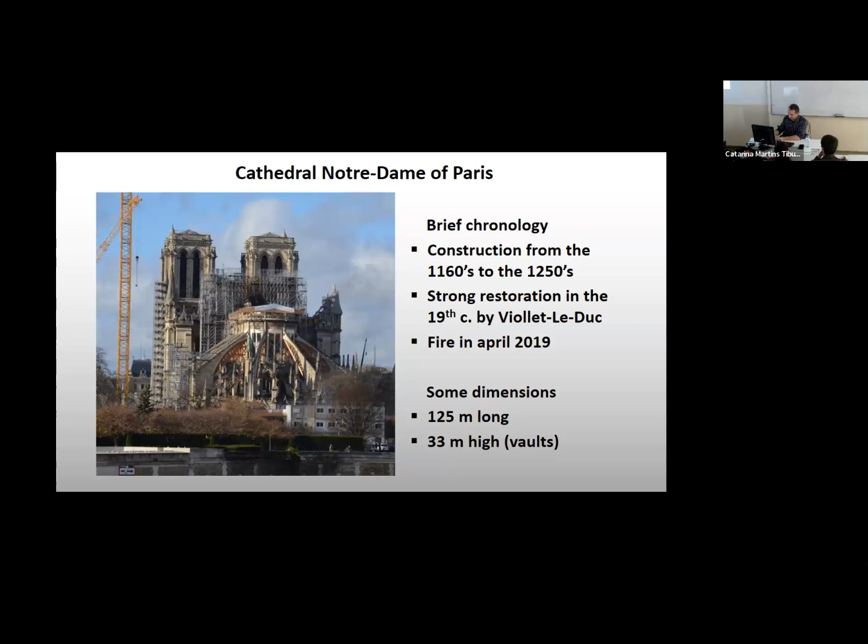So we'll go back on these questions. Just with this reminder, now I'm going to speak of what happened in 2019, how the research organized itself, and I'll go briefly then to the results of different working groups.

So, well, you all know that on the 15th of April 2019, there was this fire that took place in the spire of Notre-Dame, and in the days that followed the disaster, the researchers started to organize.

First, researchers on their own gathered and met, and they just said that they wanted to do something out of it. And really quickly, the National Research Center for France, CNRS, and also the Ministry of Culture organized and funded this program, which is still lasting today and will last till the end of next year.

There will be a great symposium in April 2024 organized in France with some of the results of the scientific program. So it all started really quickly.

And what happened is that about 50 labs, about 200 researchers gathered and were organized by the CNRS and the Ministry of Culture, because there was this idea that despite the destruction, these archives needed to be studied.

Whether material, like wood, stone, metal, or immaterial, because there's the sound of Notre-Dame, for example, that was lost because of the fire. That's also the spirit, what people think about what happened compared to other fires in history. Well, there was matter to save and to study.

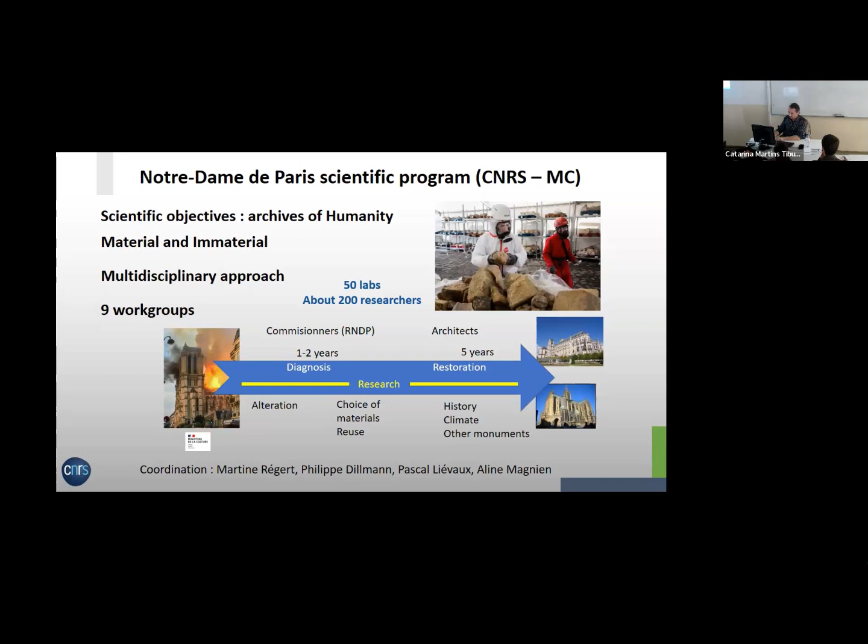And so what happened is that really quickly the Ministry of Culture, the archaeological services, decided that this was not rubble, but archaeological remains. So they decided to excavate this, not really, but as if it were an archaeological excavation.

So despite the problems of danger, people could not go there in the middle of Notre-Dame. It was only robots who could go there. There was also the lead problem.

So it was really difficult, but they decided to make some photographs from the top and to make a grid, an archaeological grid, to know which material was sampled where, was recovered where, to try to understand where it came from. Because it's obvious that if you're in the nave, you will not have a stone from the floor or something like this.

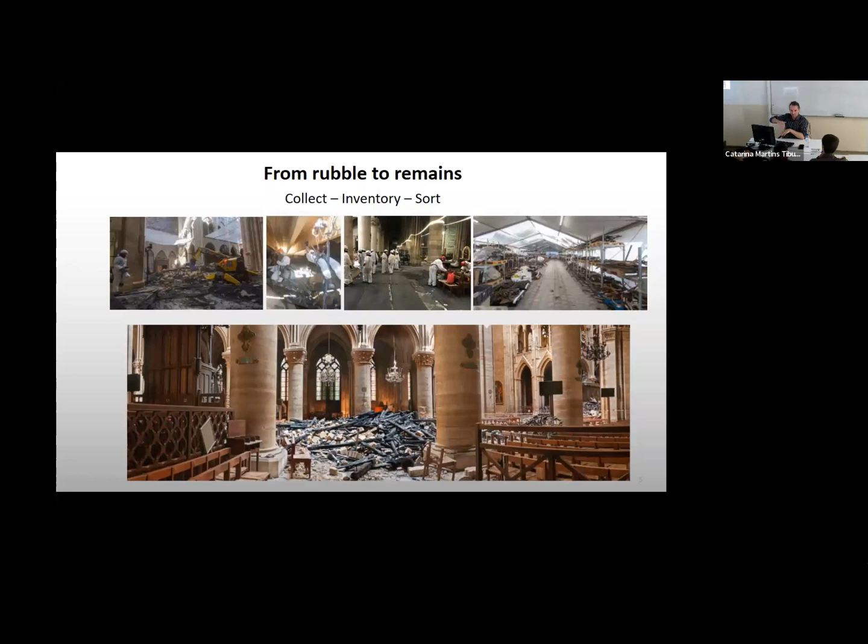Well, the spire collapsed a bit like this, so for some elements it made it a bit more difficult, but that was the idea.

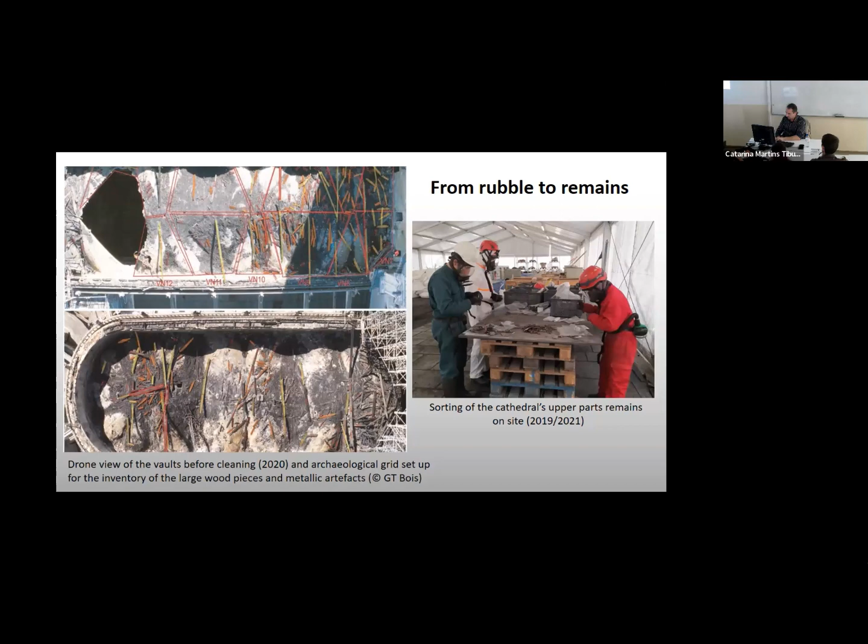Staying on the top, you see the grid that was made, the woods that were pre-identified before they were set down, and then for the rest, all the remains in the charcoal had to be sorted. Charcoal was taken out for some parts, all the real rubble was taken out, but all the artifacts were collected according to the grid. So that's us working here in 2020-21.

That was unprecedented in the history of cathedral work after a disaster. Thanks to the restoration, the monument was entirely scaffolded. At first we could access places that could never be accessed, like here on the top walls - you see me working, they're walking there, which normally you cannot do. So we had access to places inaccessible, and access to the entire monument thanks to the scaffolding since last year, only since 2022, when the restoration really started.

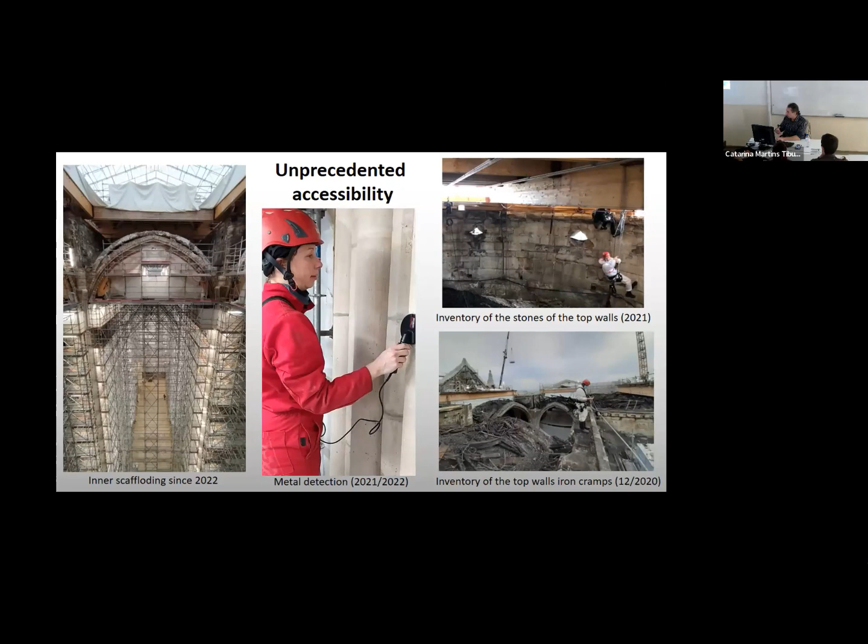That's really important, to be able to scan the monument entirely. That's how some research could be developed.

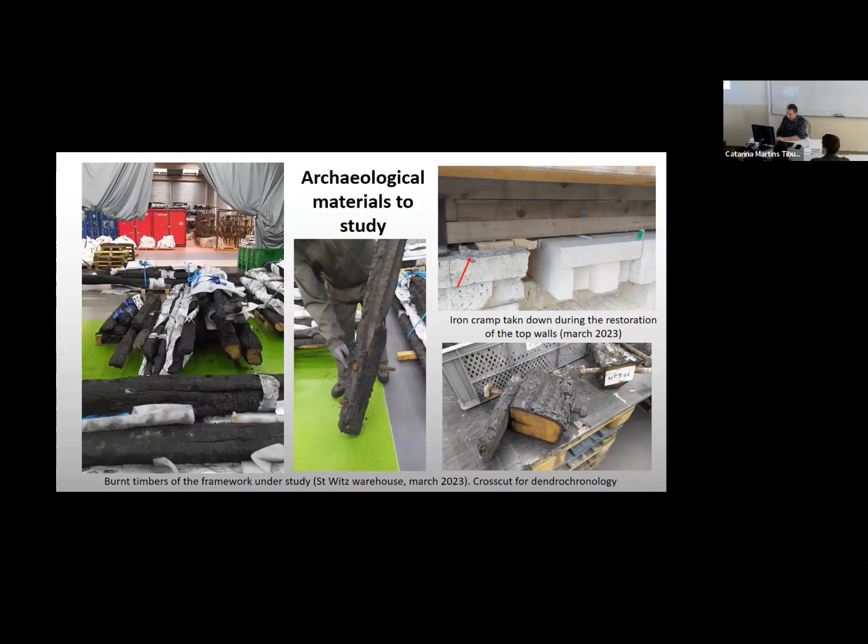There's a lot of archaeological material that was taken down because it was burnt or because it was being restored, such as this iron cramp you see on the top right. These are available to study, because some materials are reused in the construction, but the burnt timbers are not reused. So that's entirely archaeological material to be studied, and we'll see in a bit what we can study about this.

I was speaking of the 9 work groups, and I detailed some of the thematics afterward, especially for the material work groups. There were 4 main materials: stone, metal, wood, glass. Also specialists of civil engineering made a structural work group, helping the architects understand the movements of the monument and things like this.

Also work groups on decor, on acoustics, and some anthropologists working on heritage and related topics, thinking about the remains, archaeological remains and restorations. And also a digital work group that gathers the information from everybody and will make it available for the larger public.

We've been working more or less since January of 2020, when research started to be funded, and when we first gained access inside.

Now let's get into more detail about some results from the stone and wood groups and the research they're carrying out, and afterward I'll speak about what I'm carrying out in the metal work group, which is where I am.

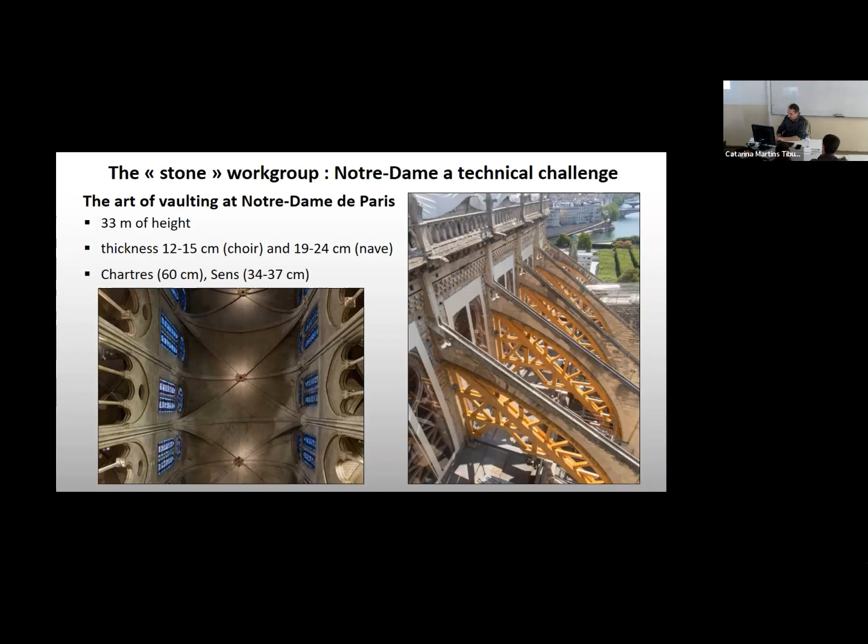To better understand the role of these flying buttresses - and the fact that it's sometimes been written about other buildings - you see here, with my arrow, that the vault is here, giving the impression that the forces of the vault go this way toward this point, and that the flying buttress might be located a little too high given the way the vaults are built.

The destruction that occurred because of the spire showed in reality that there's no need for the flying buttress to be lower, because the first part of the arch structurally belongs to the vault, and it did not fail when the vault fell—it stayed with the vault. So the architects of Notre-Dame really found the right place to set the flying buttresses, although it was one of the first flying buttresses ever built, as far as we know.

There's much more work being carried out at present, because we don't really know how these gigantic Gothic churches were truly built and how they managed to reach such height. We can see how it works, but there's research currently being funded from the wood, stone and structural work group, to understand and compare Notre-Dame with other contemporary big churches. It's just starting now to have more resources.

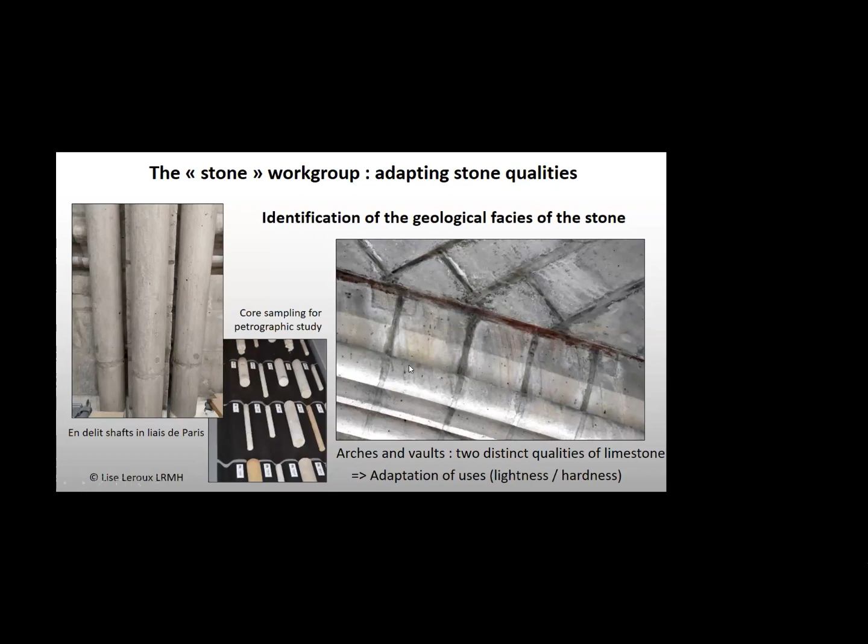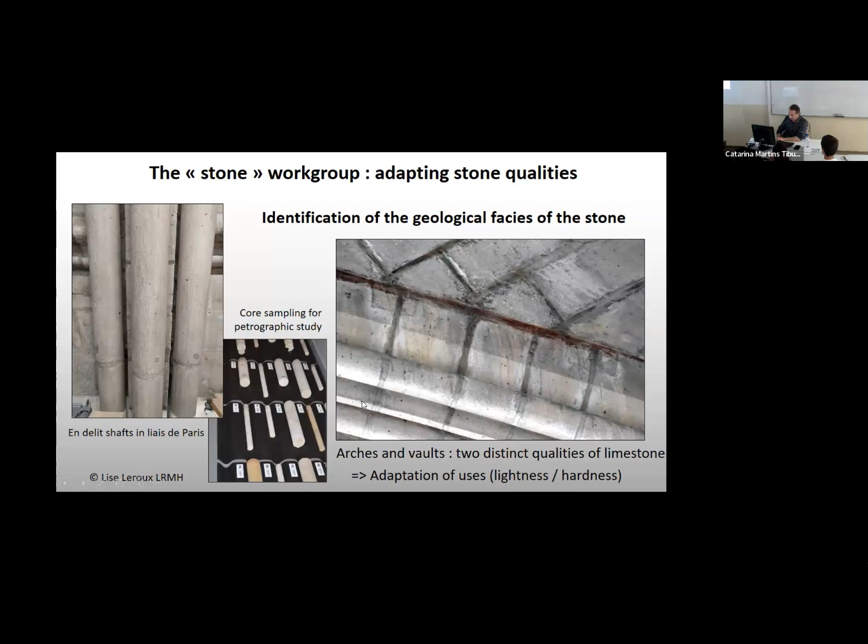The arches that need to be finely cut are made of harder and heavier stone, the best banks of stone, while the vault webs are made of lighter, less resistant stone, which helps lighten the overall structure. For all the decorations, the traceries, the slender columns about 4 meters high and only 15 centimeters thick, they used the hardest and finest stone, called the liais de Paris stone—a really thin bank, used at that time for such sculpture. So there was real adaptation of uses between lightness and hardness of the stone.

Sometimes, in some places—here you can see the inside of the core of the top walls and the inside of the nave top walls—at two different times, roughly partly in the late 12th century and here in the beginning of the 13th century, we have different kinds of work. Here there's reuse and it's not really homogeneous in the first part, whereas here it's really homogeneous.

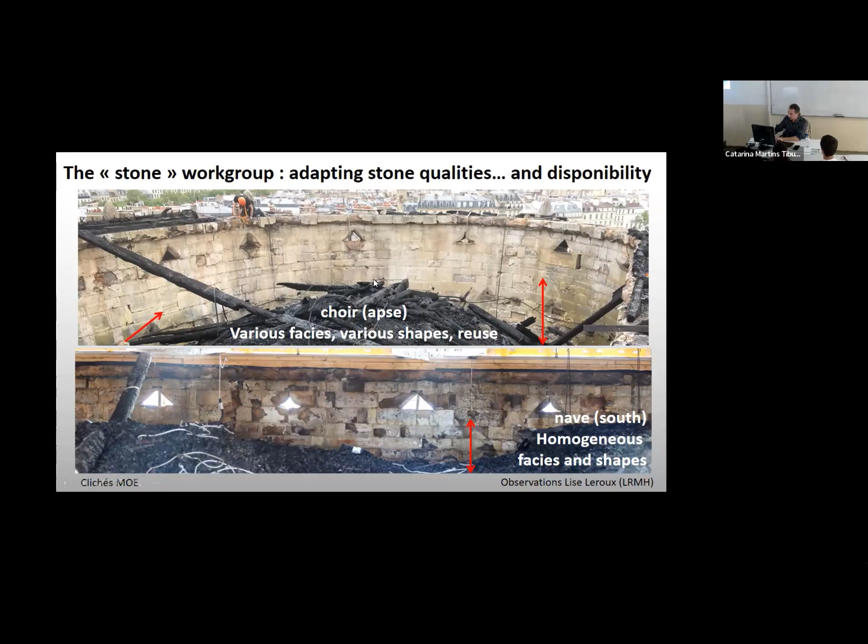So there might be periods where, despite what was said before, they needed to, or had at their disposal, stone that could be reused, and they did that even though we're in a really rich building yard. Reuse is an important thing when you can have it. In some places in the construction, this could be proven for the first time in the open parts of the clerestory.

Another thing is the masons' marks for the first time. I'm saying masons, but it's not really single marks from a single person—it could be studied throughout the cathedral thanks to the scaffolding. I'm giving an example from Cédric Moulis in the stonework that scanned the signs and showed that the kinds of signs are really different from the north and south, meaning two different teams worked there—two different groups of stone cutters.

There's also a difference between the first bay on the west and the others on the east. You can see a break here between the signs on both sides, meaning there are breaks in construction. To better analyze these signs, sometimes they're identical but carved in different ways with different tools, which means it's not a mason's mark but rather a workshop mark, or used to identify the stone.

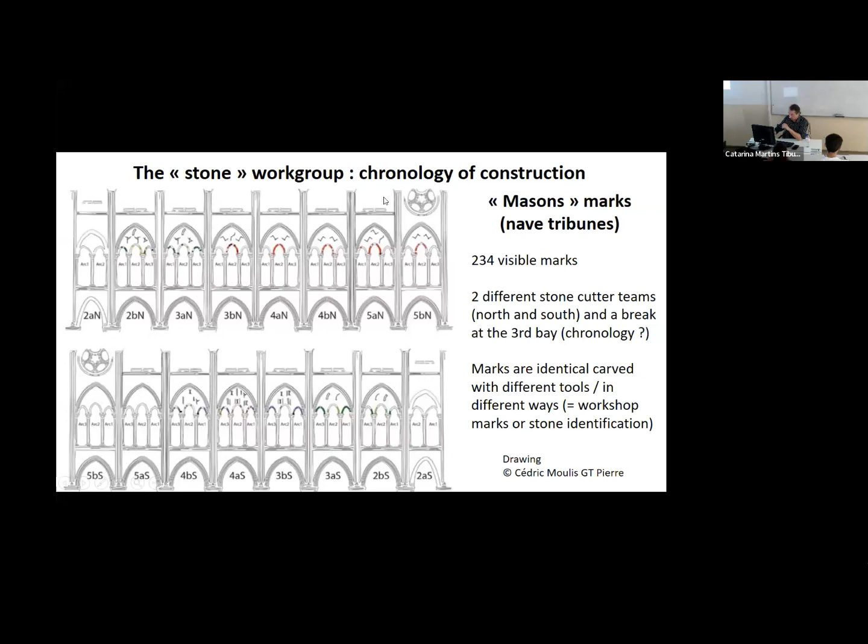So better knowledge about the chronology of the cathedral that will match with the results on other materials such as wood, also for the upper parts, and metals as we can see.

About the wood, there could be a thorough study. There were already some studies in the 1990s, but there's a thorough study of the current timbers being carried out. Now we know the timbers are all made of oak, which is really normal for a framework at that time, and that most of them are young oaks, about 60 to 80 years old, not more. They were specifically selected for their size, quite thin actually, because 30 centimeters is not that thick for a tree, and for their length, because we needed 12 meters to span the main vessel, the main nave of Notre-Dame.

That's the dendrochronology information we take, and it also means that one framework, about 1,000 trees, is only 3 or 4 hectares of forest. So it's not that much.

It's been said that to rebuild Notre-Dame at the beginning, we would need lots of lands and forests to have the necessary trees, really old ones, but that's not the case. That's not how it works.

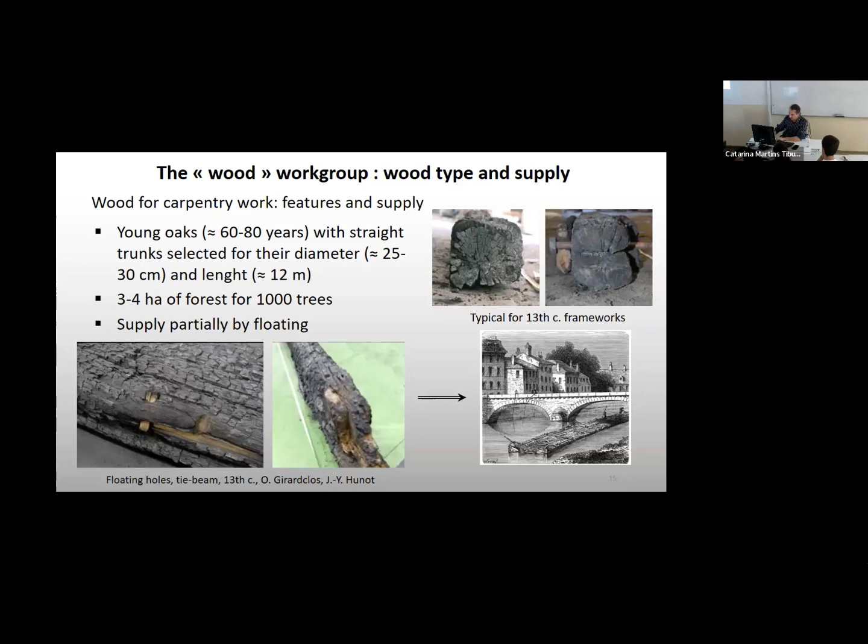Now the question is, where did they come from? In the timbers, even the burnt ones, there's still much information about the geographic origin and about the climate in which the trees grew, thanks to certain elements, certain isotopes. I'm not going to enter the details.

One of the works of the woodwork group, and one PhD soon to be defended, was about determining the provenance of the woods regarding where the chapter and the bishop had their domains, regarding the basin of the Seine, because now we know some of it comes by floating, and regarding also the type of trees bred in these regions.

We were looking for really slender trees like this, that could come from some kind of forestry made rather by coppice, to get this kind of tree so they would not grow too thick, because one tree is actually one timber. You do not saw it in the middle. You take one tree, just slice off the outer part, and one tree makes one timber.

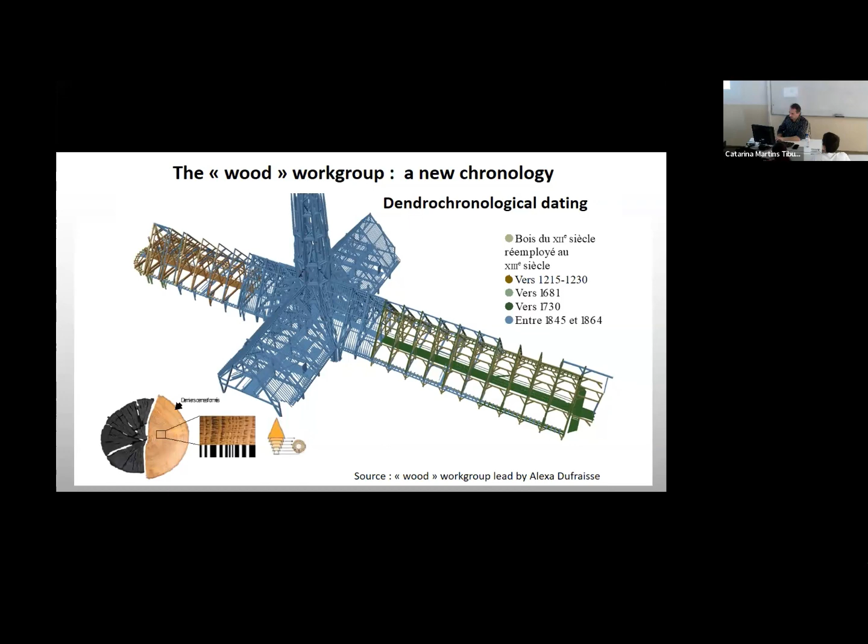There are phases not shown here, but in the late 13th century it seems there were already some really heavy repairs at that time that were not known so far. So there's a really precise chronology that's going to be enriched thanks to these results.

So now I'm moving on to the question of the metals, which I'm working on myself.

So I'll try, if I'm not too long, to speak about iron and lead. If I'm way too long, then I'll just speak about iron.

Just so you understand, for stone and wood there were many discoveries, and so it was for iron. About iron, we knew almost nothing about Notre-Dame. We did not know that iron was used in its structure since the 12th century, that it was maybe the oldest Gothic church to have used these iron cramps as a construction material. So some iron cramps appear - you see, that's the wall where the framework was. Without burning the framework or restoring it heavily, we could not have seen these reinforcements, and also many pieces that were found inside.

About lead, well, we knew that lead was employed, but I'll go back to this further, because it was the opportunity to lead some programs on lead, although most of it was destroyed during the fire.

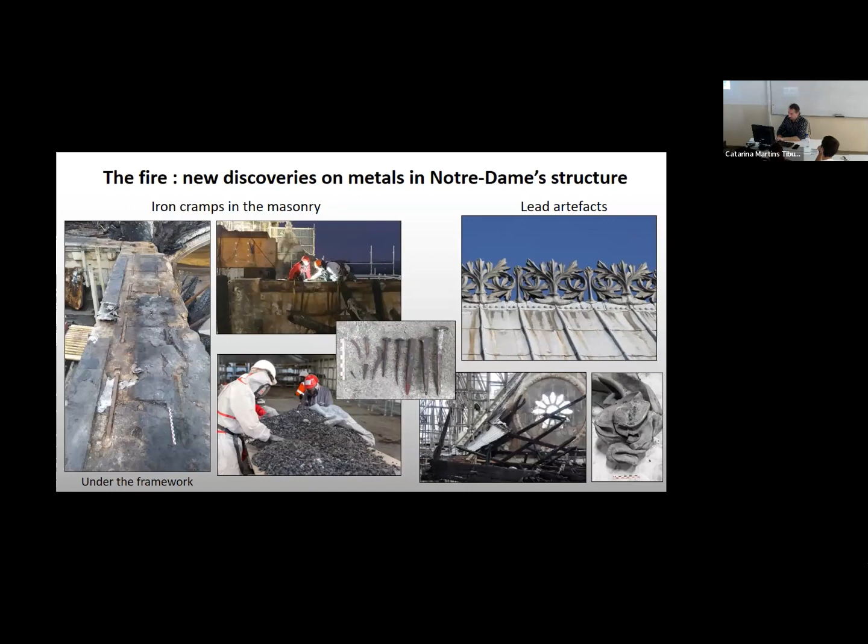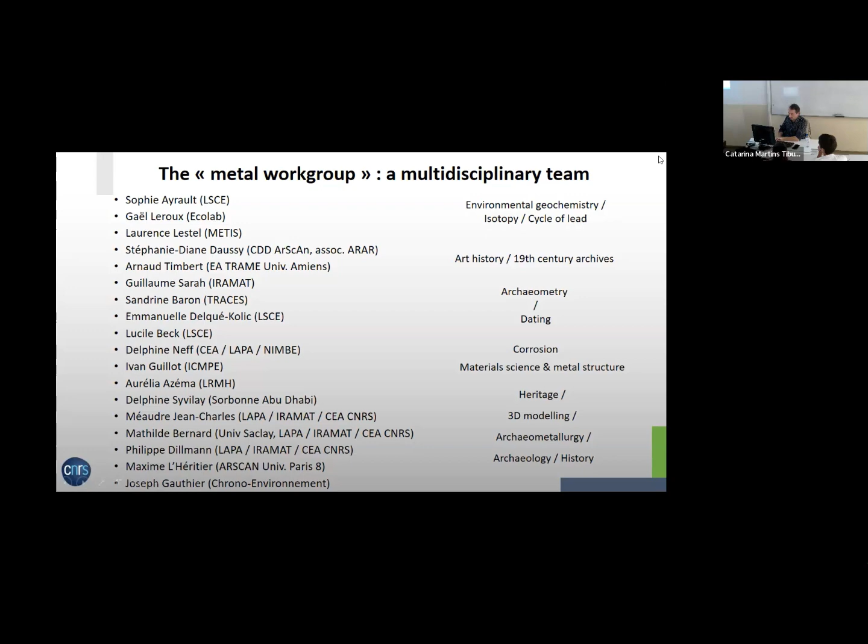About the group, I'd like to insist on the fact that the presentation I'm making is not the single work of a single person, but the work of about 50 people working on different thematics, from environmental chemistry to archaeology, history, and material science, all involved in this project and working with their different skills to better understand the way these materials were used, and how we can study them to better know the construction, and also other things.

So I start with the research on iron. As you can see, there are multiple questions that arise when it comes to iron in our architecture. First, to know where it was used and in which period it belongs - does it belong to construction, does it belong to repairs?

We also want to investigate the quality of these alloys, notably for reuse - that was questioned by the architects - but also more broadly to compare Notre-Dame with other monuments. There's also the question of dating, which is important to understand if it was from the first construction or not.

Then, knowing all this, we try to evaluate the role played by some parts of the metalwork, and to investigate the questions of supply of the building yard, with the question of reuse, which is important for stone, for wood, but also for metal.

About this, we had a first study on some samples, and that's what I will speak about. But I'd like to stress that there's a PhD under my supervision and other colleagues that started last year, following the last parts of restoration. I'll speak a bit about this later, and that will bring much more information, much more iron elements analyzed than what I'm going to show now - that work just started and finished about 2 days ago.

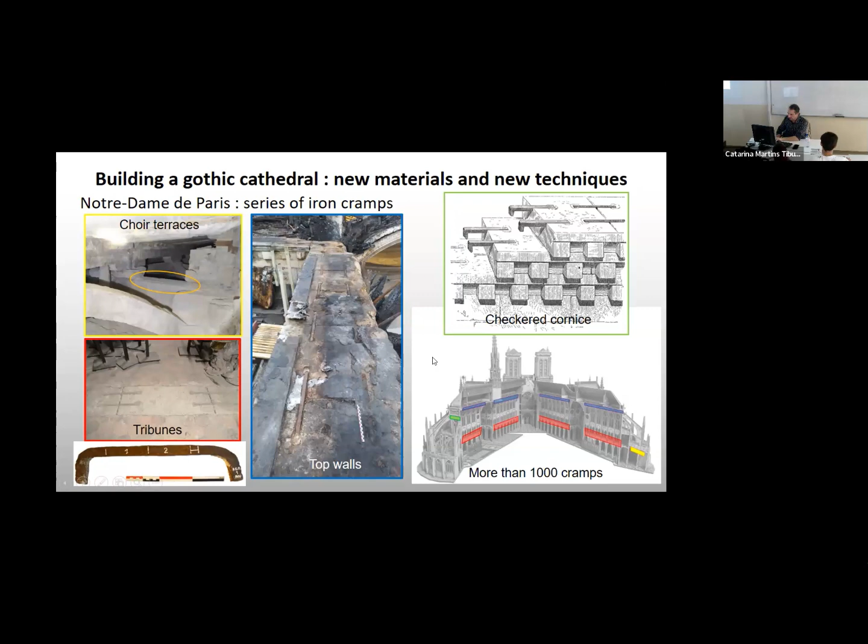So as you see, this is 30 centimeters, so they're about 50 centimeters long. They weigh about 3 to 4 kilograms, so that's several tons of iron placed in the structure. Smaller iron cramps are also used.

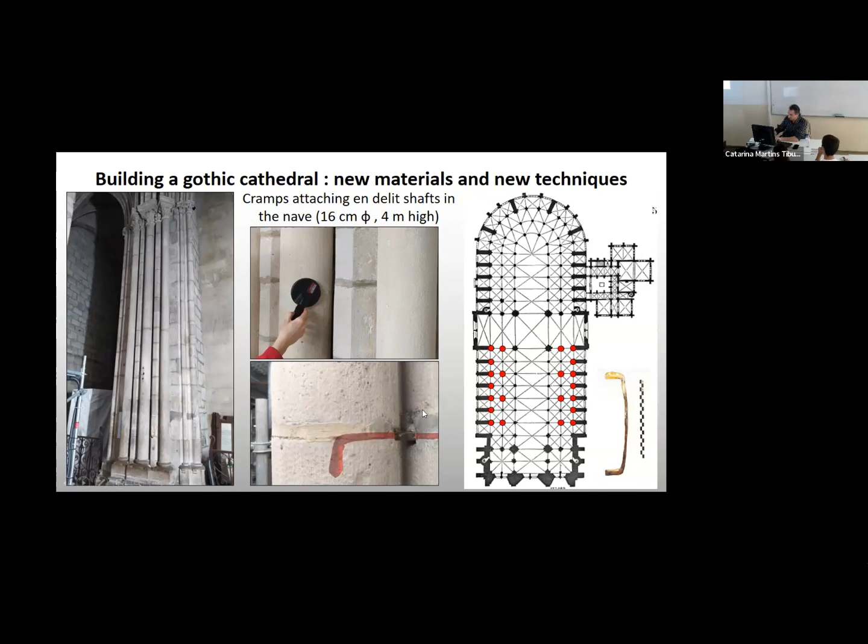These big columns that I talked to you about before, that are really slender, are all attached to the masonry to prevent their collapse by this kind of iron structure that we discovered thanks to metal detector, which we can see actually in some places once you have the scaffolding.

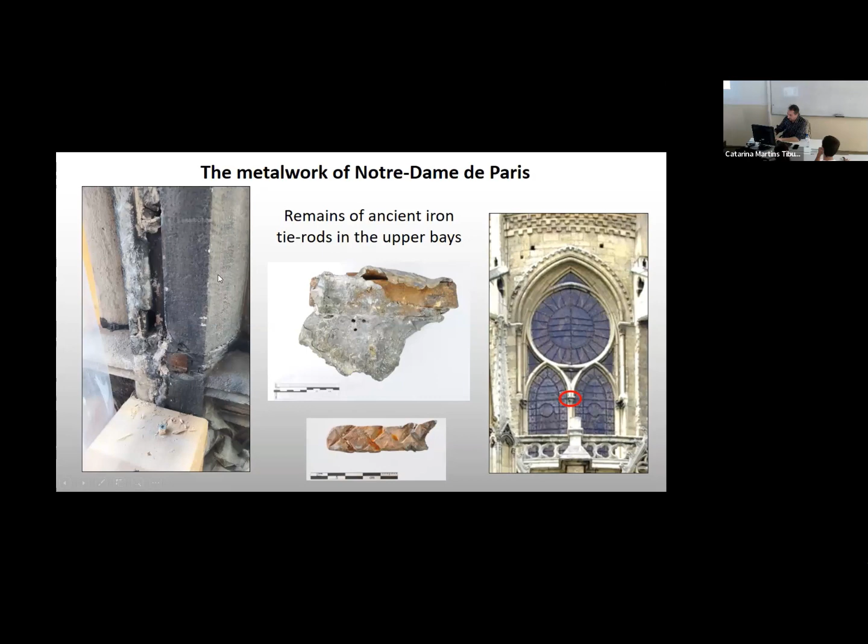Also elements in the framework, which are here probably rather from later consolidations from modern times, but there are differences that still have to be investigated with iron pegs and bolt rods. Some are forged, some are machined, so it means that they're probably from the 1780s, and also many from the 19th century, which tells us about the restoration and repair phases of the framework at that time that can be known about through iron.

And many nails also that can be linked to several adjustments in the framework and in the pathway that was placed in the 13th century. So all this could be collected and replaced in the structure thanks to the architectural grid that I spoke of before.

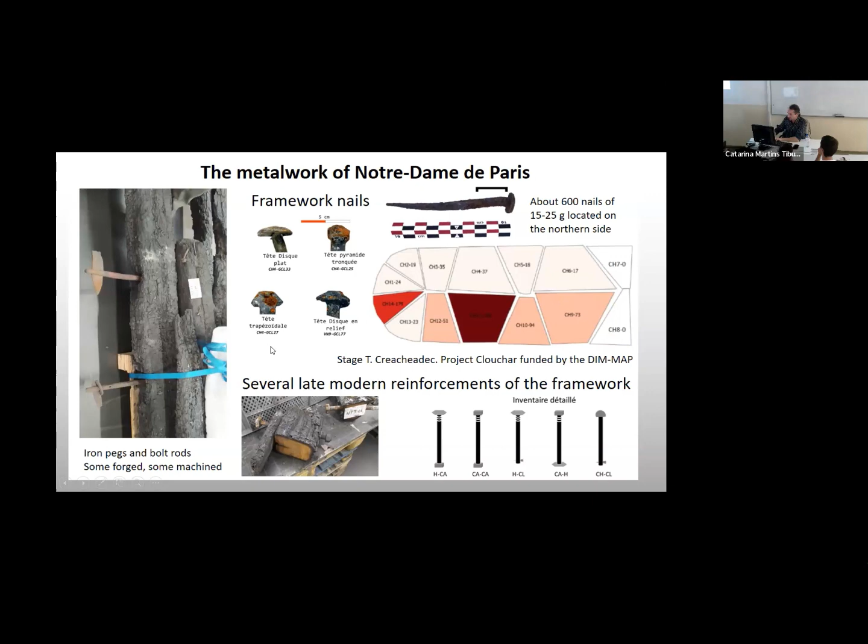So iron is not only in the medieval parts, there are also repairs that were installed in the 19th century by Viollet-le-Duc and Lassus, the two architects of Notre-Dame in the mid-19th century. And especially here is the checkered cornice that we saw before, in which you have some iron cramps.

And it seems that Lassus did double the reinforcements with a big iron chain that goes through the entire length of the choir, and that goes also across. So this one is a bit broken. You can see this one might not be really effective at present, but it's being restored, that goes across both the bolts across the main nave.

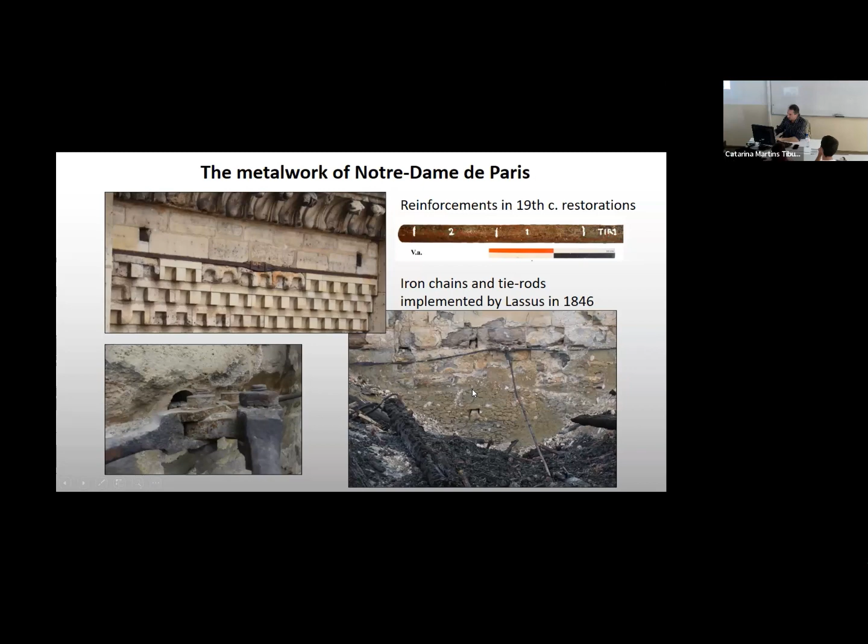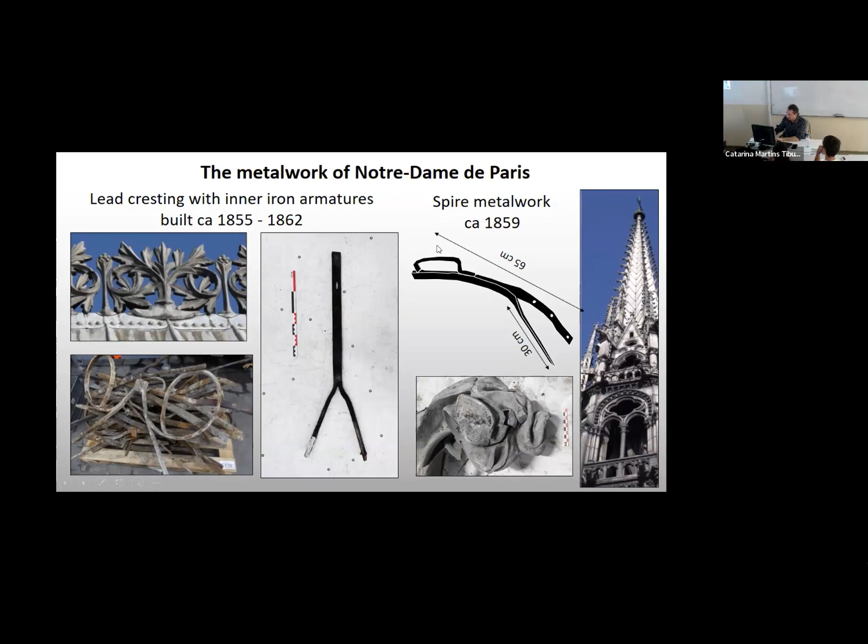And also here, the elements that are used for the decoration of the core that was built in the mid-19th century. And same for the spire here, where you have all these decorative elements. There's an iron structure inside that is attached to the wooden structure of the spire. Some of them could be retrieved after the fire because they fell and did not melt.

So to sum it up, you can see here that we have elements in green from the 19th century, or even in red here, the ties that are placed on the top, and also the cramps that are here, here, and also here. So you see it's always at specific locations above the arches or on the top of the masonry, and we'll discuss that a little bit. So it means there's not iron everywhere in the construction of Notre-Dame, but at certain specific places.

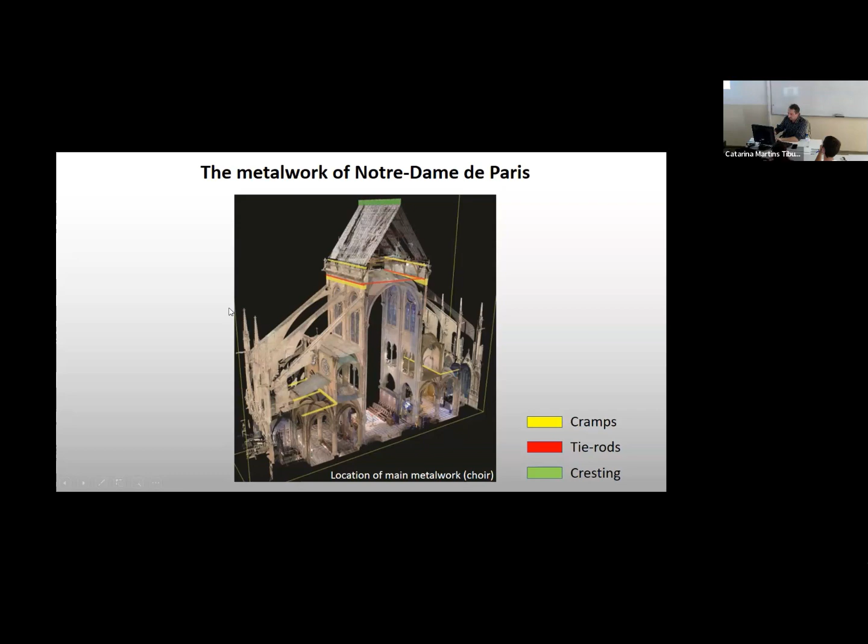So for the 12th and 13th century, there's actually not much historical sources I can speak to. So the monument speaks, but also the material can speak. That was one of the approaches that we carried out.

So on some elements, I'll speak specifically about the 12 cramps that we studied so far, knowing that there's much more to come. There might be 100 samples that are going to be studied in the next PhD of Mathilde Bernard. That will definitely renew all I'm saying now, but that's all I have for now, and I will explain that to you.

So we could sample some elements with the architects because they wanted us to do some analysis on them, and others because they were broken, so it was not really a problem, and some had fallen on the ground. That's why there aren't many of them, because it was before the restorations. Now that the restoration took place, all the cramps were taken down, so many of them were not reused, and we could have access to them then.

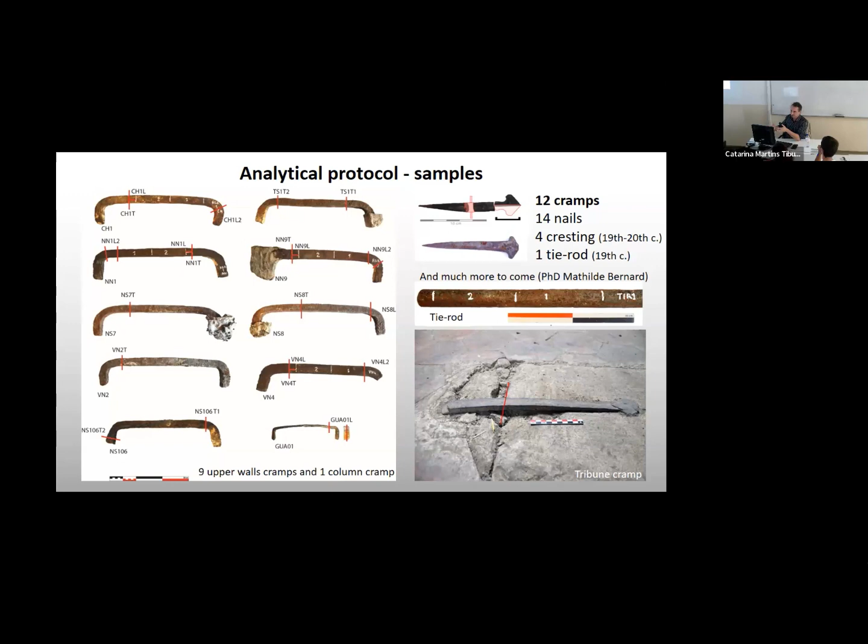Most of them were reused, but when there's 1,000 cramps, if you reuse 90%, there's still 100 remaining, so that's interesting from a scientific perspective. So we had a protocol to analyze this, and I'm not going to go through everything.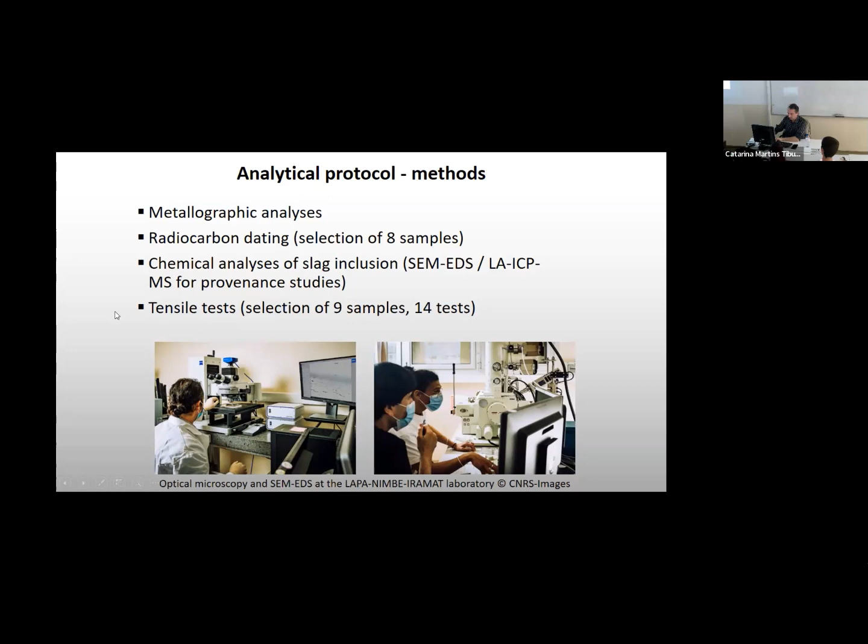We did some metallographic analysis, I'll speak about this. We also did some radiocarbon dating, which I'm supposed to speak about also, and how it's done, and analyzed some impurities in the metallic matrices that can give information about the provenance of the material. I won't speak about the tensile tests, but if you want to ask questions, I can do that.

It's mainly mechanics, and it was done for the architects and to compare with what we had done with other companies. So the second part is to investigate the quality and dating of the ferrous alloys, to study how they were made, and also the question of reuse for the architects, which was validated because they are reusing the cramps in the construction. So we'll try to see what a chemist does when you study iron - you have to cut it.

There's no other solution. You have to make a cross section to look inside the matter, because iron was never made in a liquid state in ancient times. So you have heterogeneous materials, and you need to see this heterogeneity. So here you can see this element that we saw before - it was cross-cut and then cut in the length, and you can see the form it takes.

Once polished, you have a mirror surface to look at it under the microscope, and it's been etched with special reagents which reveal the structure. If it were homogeneous, we would have a single color, and that's not the case. We have ferritic iron here - raw iron with no steel, no carbon inside, which appears bright. You see the iron grains, but in many samples you also have a bit of steel, this brown part, mixed in with the iron. Not going into the details, but you can see it's a heterogeneous material.

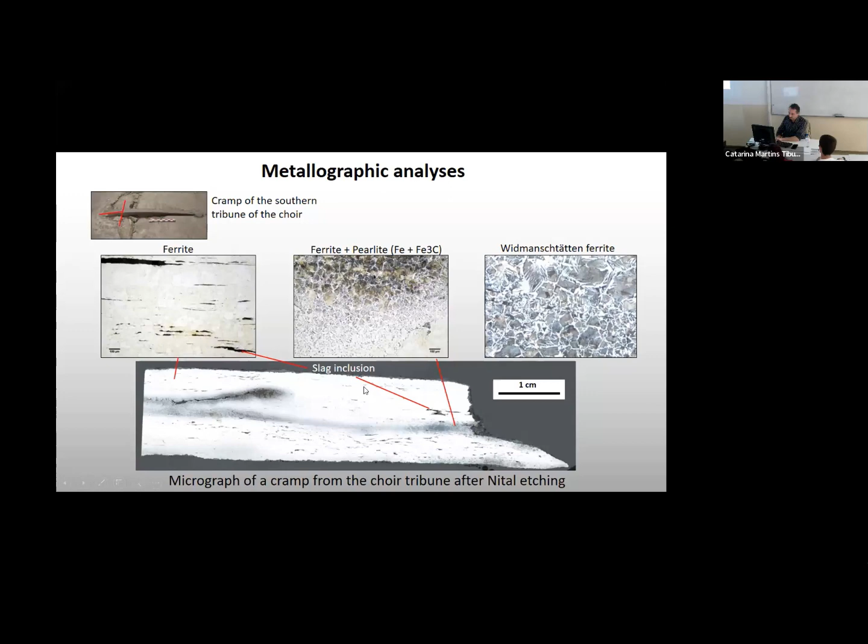I'm not saying it's bad quality - it's normal quality, not high quality. If they had wanted high quality they would have maybe paid more for it, but they did not usually require it. You can also see many impurities inside, which are remnants of the ore that have not been totally reduced. We'll speak about this later, but all these points are also big weaknesses in the structure. In modern steel, you would not see this at all - you have a homogeneous structure because the composition is much more controlled.

What we can also see here is welding lines, which means that every single - and we found them in every single iron cramp - you see them here quite clearly, and you see that the materials which are assembled are not quite the same all the time. Here you have something quite clean, here you have something with many impurities like inclusions, also here. So it means every cramp was made by assembling smaller pieces of iron together. That's something contrary to what I said before about the quality - we never saw this before in any other building.

So that's one question still unanswered - why did they do that? I try to go further on this when I speak about provenance, but it seems that at one point of the operating chain, whether for cases of reuse of smaller bits or for other reasons, they assembled this, and it's not just for one cramp, it's for almost every cramp that we study.

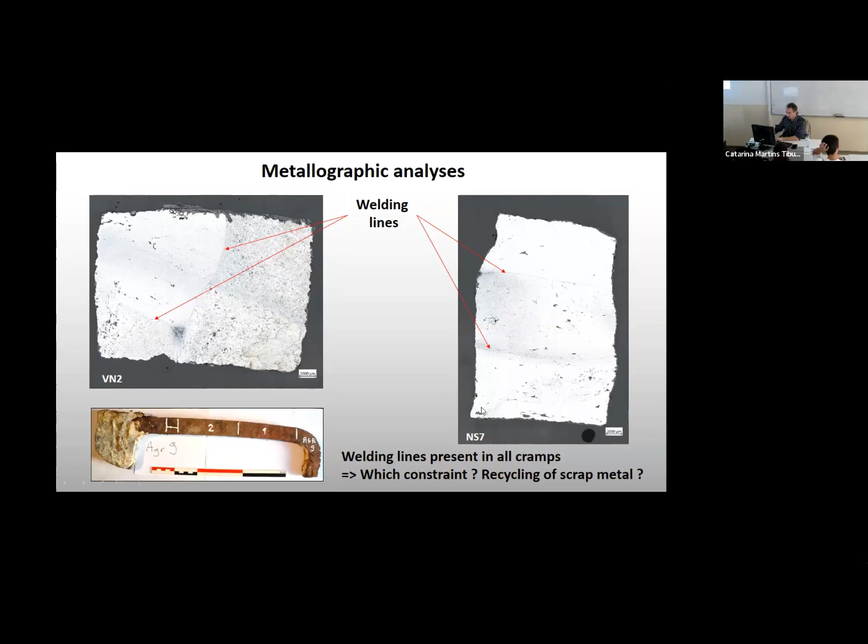And knowing that - what I didn't say is that one cramp is about 3-4 kilograms, as I said before. That would be the weight, which is smaller than the weight of an iron bloom that would come out of the primary furnace. So there would technically be no need to do this welding in terms of means of production. So that's another question, another constraint that we're trying to look into.

The good thing when you have steel in your matrix, because it's heterogeneous, is that you have carbon. Steel is an iron-carbon alloy. About 10 years ago, a method was developed

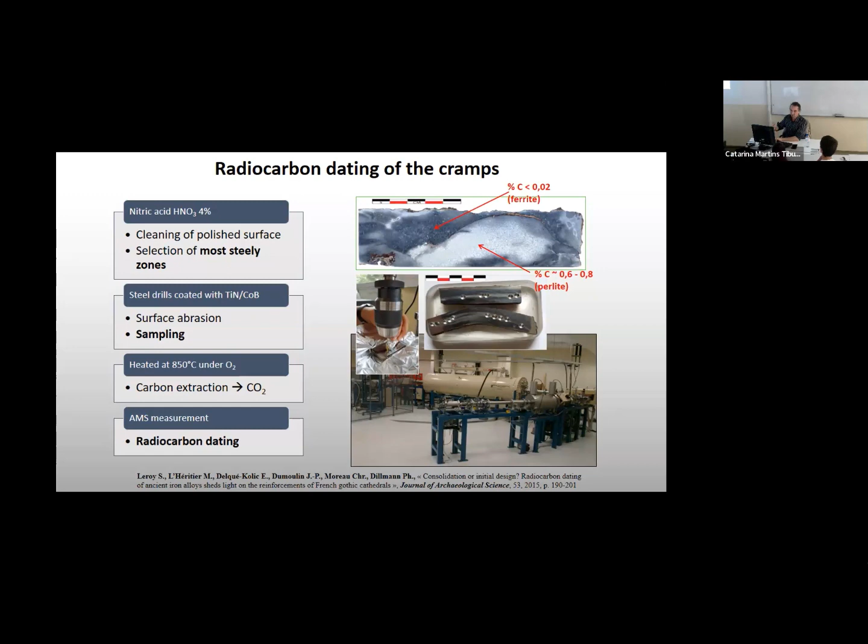to extract this carbon from the steel to be able to date it using radiocarbon dating. I'm not going to go into the radiocarbon dating explanation in detail, but it's as if you would date charcoal or a bone, anything that contains carbon. The quantity of C14, the radiocarbon, depends on when the material lived. Here the living material is wood, the wood that made the charcoal that entered the production process of the furnace. So you date the production of the iron.

So here you can see the same thing we made on the carburized part, which you can see here optically. We had some results for the tribunes, the cramps of the tribunes, and the cramps of the top walls. Even though the precision is not really good for carbon dating, especially for this period, we can see that we have really two groups of datings: one for the tribunes, which are the two dates I placed here at the beginning of construction, and here the date of the roof framework, as it's known by dendrochronology.

We see that the tribunes match the beginning of construction, and that the top walls rather match later dates, matching the beginning of the 13th century. So now we're sure that all these iron cramps are really contemporary with the construction time, and that the ones in the tribunes are maybe the oldest iron cramps used in the church ever.

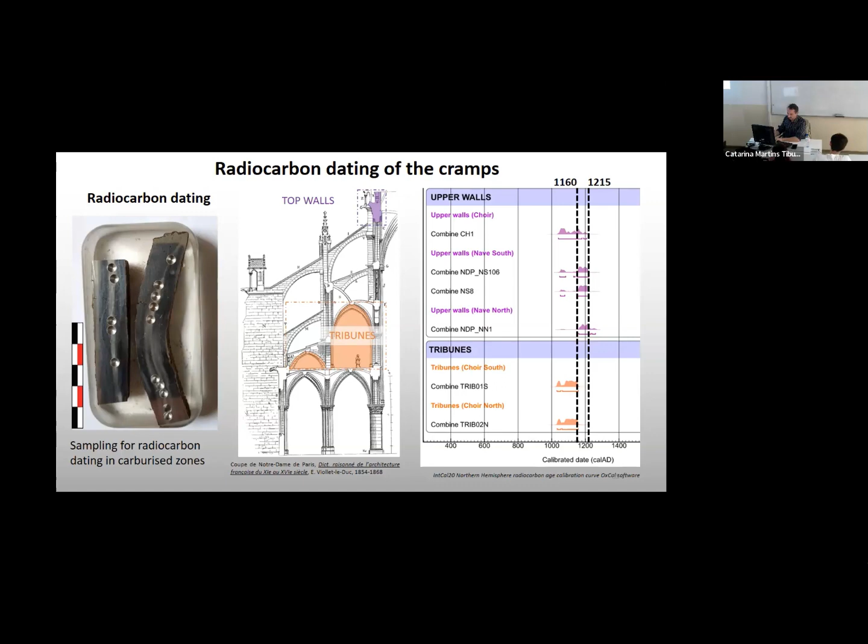So maybe it all started in Notre-Dame regarding this use of iron in architecture, regarding flying buttresses, regarding going so high for the roofs. All this might go together to try to reach this architectural challenge. So now, what's the role played by the metalwork?

That's a new thing being developed, notably in the PhD of Mathilde, in collaboration with the engineers of the structural work group, where we're trying to understand why they placed the iron at certain places in the construction, and to try to model how the construction behaves with the iron and without the iron, locally and then more globally at the scale of bigger parts of the structure.

As I talked before, iron is not everywhere in the construction. You can see here it's above the main arches, which peak at about 11 meters, really high for that time. And maybe when they were built, they were not sustained by the weight of parts which were not there at the beginning, so that might be one use for these places.

But what's interesting and what we're looking at here is on the top, where you see what was maybe the place of the ancient framework before it was remade in the 13th century, and there's the place of the new 13th century framework. There are questions about how the framework reacts with the wall, the thrust of the framework on this side,

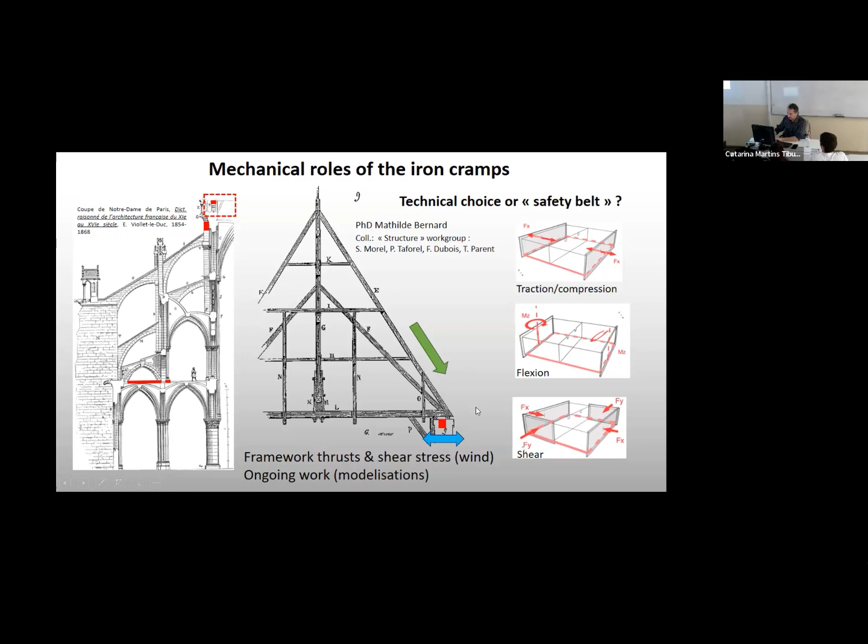So that would be maybe one of the goals of the architects. The last thing I'm going to speak about regarding iron is trying to understand how the iron arrived at the monument. We know for the 14th, 16th century, we have reports on tolls on the Seine.

We know there's iron coming from Normandy. We know there's also iron going from Paris to Normandy on the other side, so different qualities of iron crossed each other on the Seine River. We also know that iron is produced almost everywhere in France or in Europe at that time.

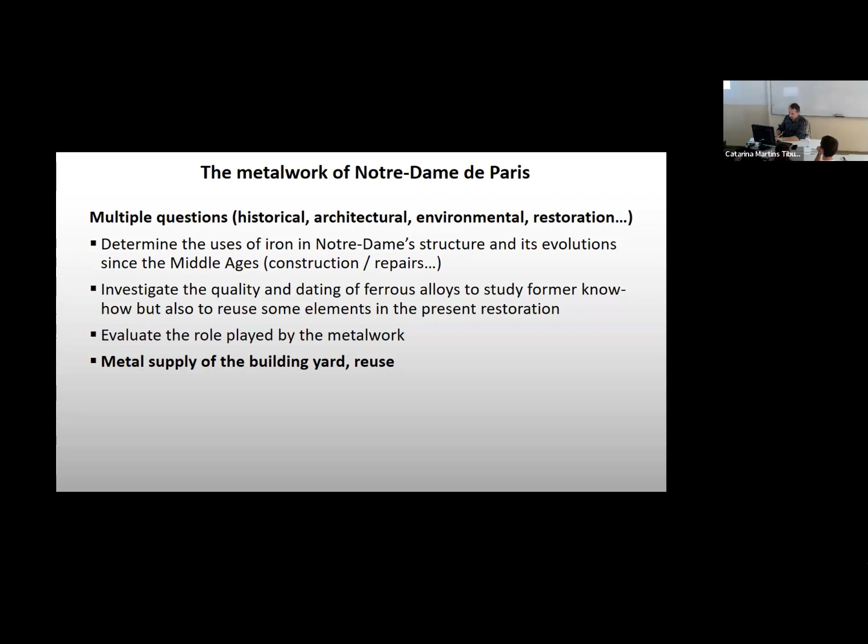Iron is one of the most available components on Earth, and small formations of iron ore can happen almost everywhere. They would not be profitable for big industries because they're not big enough, but in medieval times, some bloomeries could settle on smaller iron ore deposits and exploit them. So there's really iron production in many places at that time.

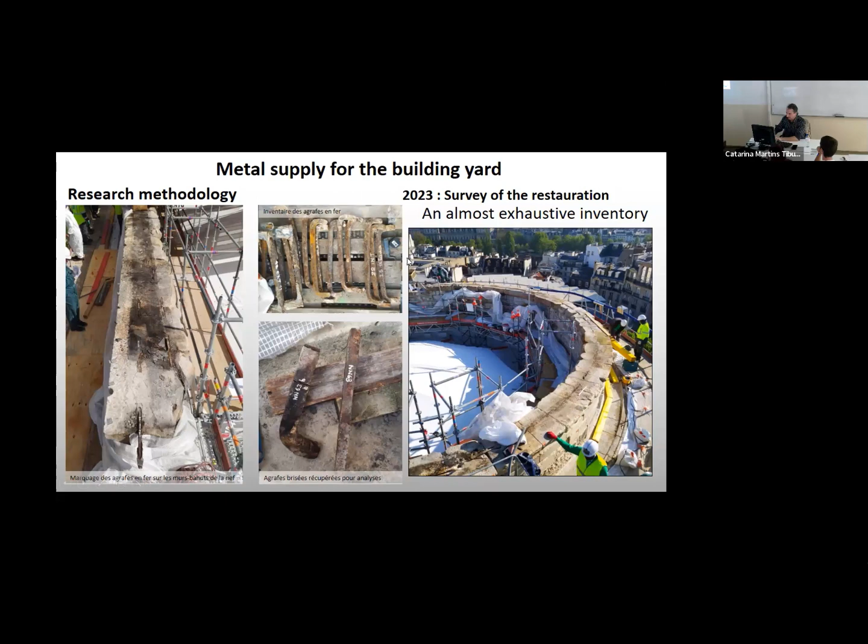The first approach was on the monument itself, not inside the matter, but to gather physical information on the iron cramps. As you see here on the top walls, they were all dismantled, because the first row of stone was entirely changed since it suffered too much from the fire. So we could have access, not to all of them, but to most of them, to see how they were made and what their shape was.

What we could see is that there were notably different workshops, different smiths who worked on these iron cramps, because they shaped the cramps in different ways and sizes. You see here in Nave North there's a group which is bigger than the other cramps. And when you look at the tip of the cramps here, you have some marks made to attach them better.

I didn't say that they were sealed with lead in the stone, most of these cramps, so that the iron cramps would better attach the lead when it's being poured into the ceilings that are carved in stone.

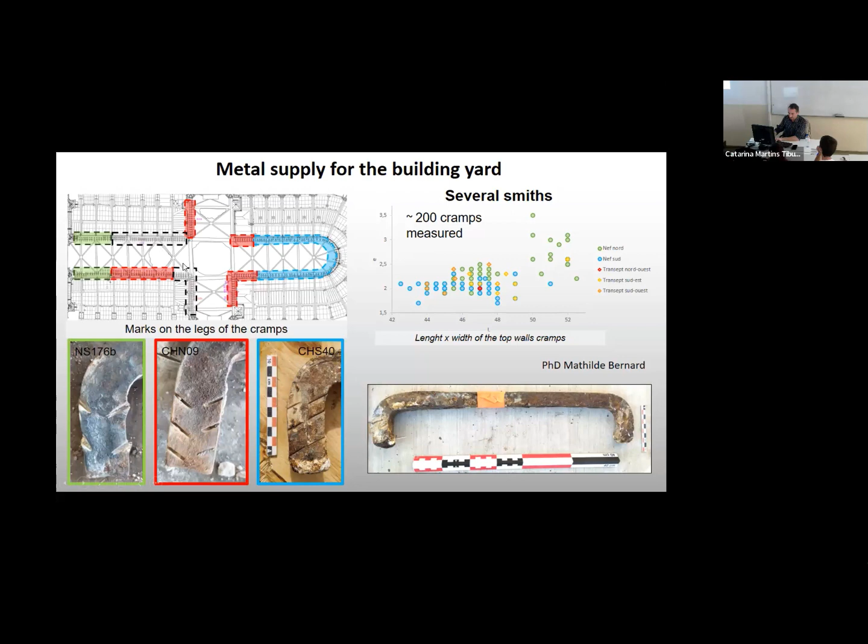So you can see there are different forms, and that's something we really did not expect, but you can match some to maybe construction phases, but also link them to the intervention of different practices, different workshops working here — some places very homogeneous, some less homogeneous, so we'll have to look into it more precisely.

And then we can go into the matter to have some more information. I already spoke about slag inclusions, the impurities inside the metallic matrix of ancient and medieval iron, up to the 19th century.

They really bear some kind of fingerprint of the ore, because when you reduce the iron ore, you form these slag inclusions which have basically the same composition. So if you use a different ore, you would have slag inclusions with a different composition.

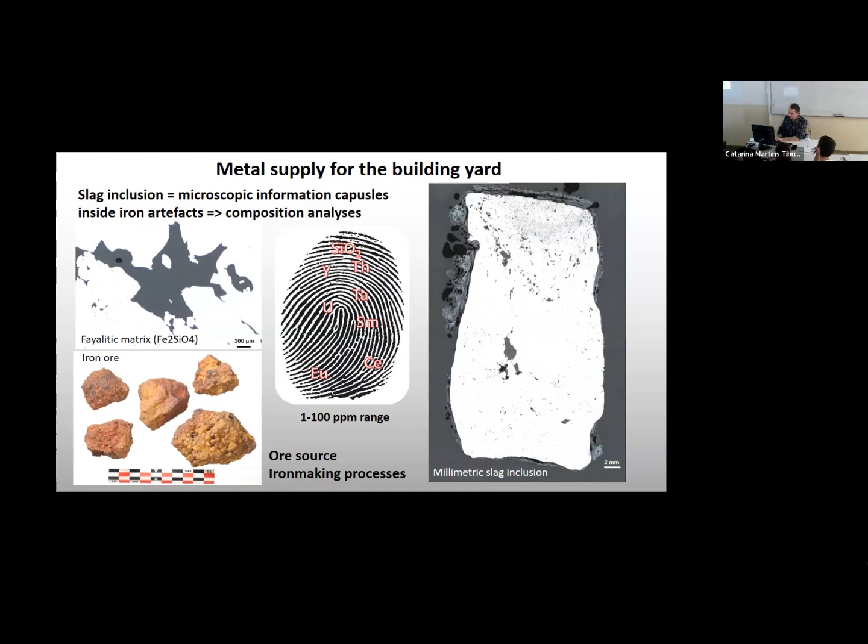So analyses and experiments were made about 15 years ago — this is a method that's been used for 15 years. When you analyze the same ore, the same slag inclusions, you get something with the same composition, so you have one line. With another ore, you'd have another line here, or another line.

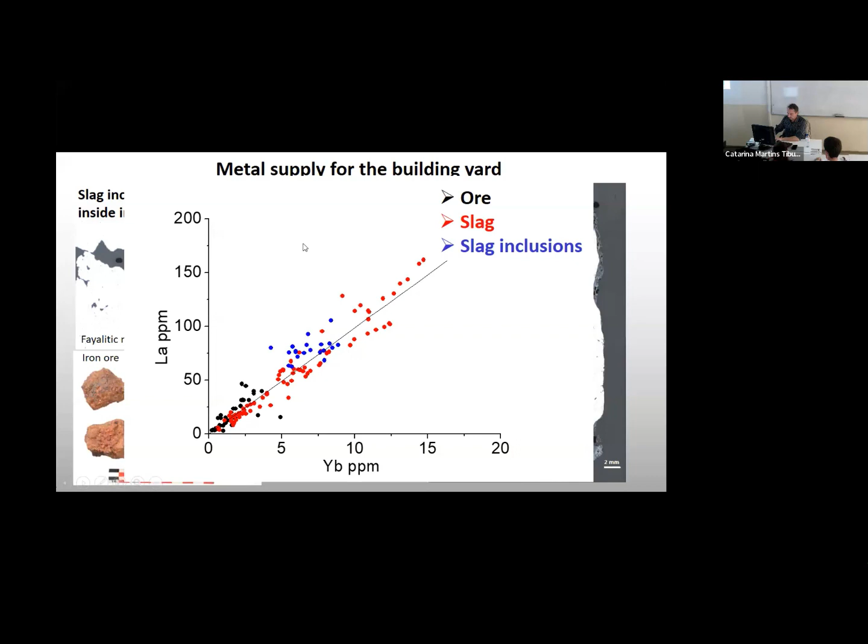When you get into analyzing elements that are present in smaller quantities in the matrix — ppm, like 10 ppm, is 0.001%, so it's not that much — you need precise means of analysis to get the information.

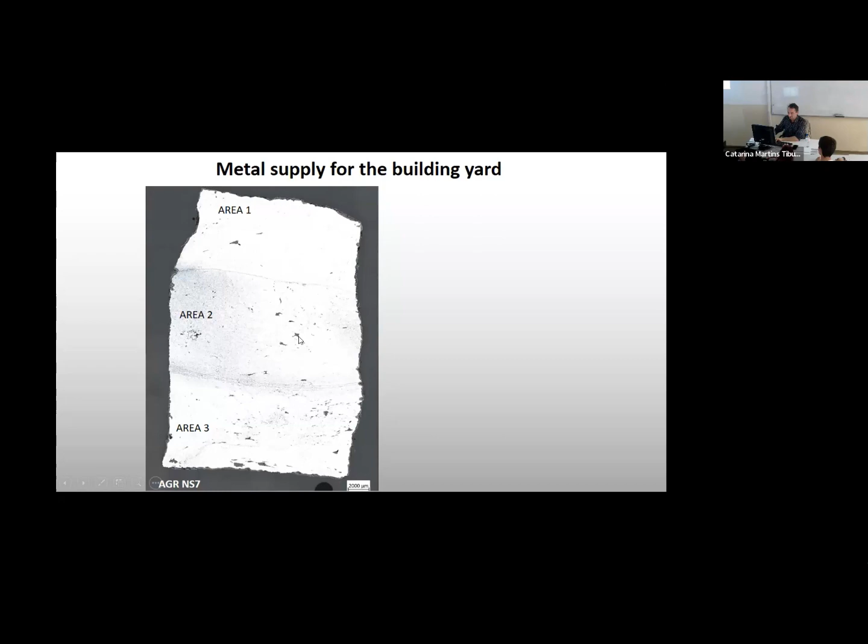So the first thing we did was analyze these cramps that had some welding lines, to see if the welding was between different kinds of materials or not. And that's how it turned out.

Here you see the blue area in the middle — we analyzed every dot, each one an analysis of one slag inclusion, as you can see here. The blue dots are aligned for this middle part, and the two others are aligned differently, which means we have what's called a classic weld: you open one bar, stick a bar in the middle, and then hammer it, so you have the same bar on top and bottom, and a different bar inside.

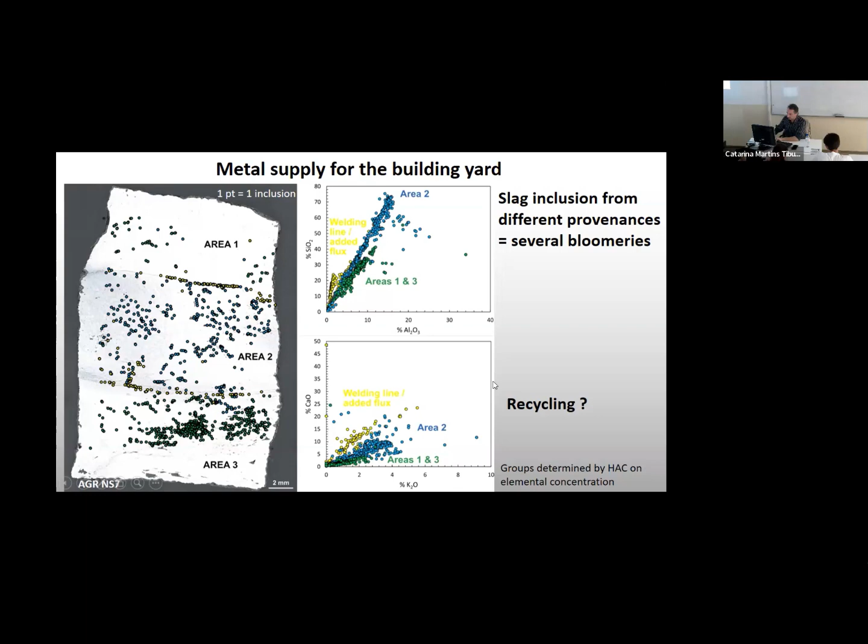You can also see there are some additions with a different composition for the flux made during this process. So, is that recycling or not? I'll try to get to this question.

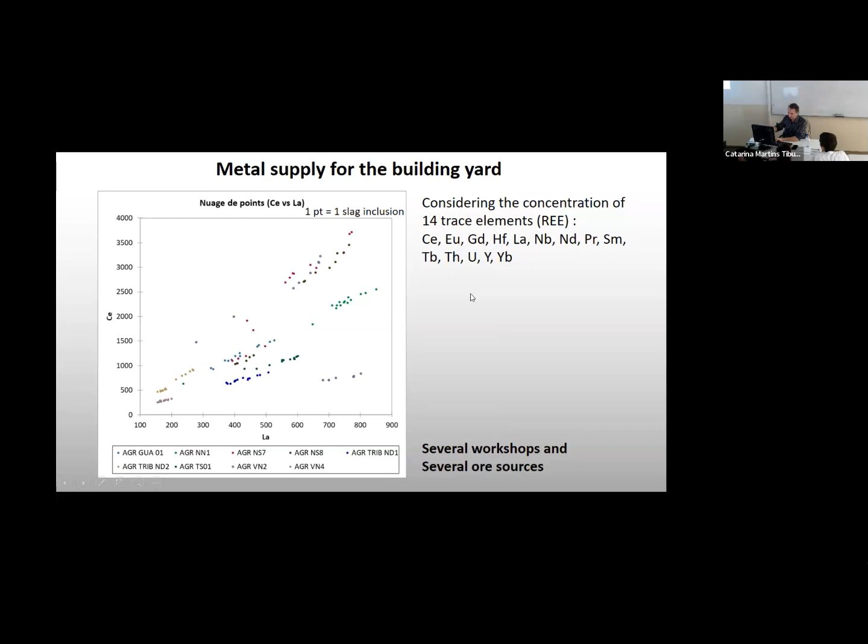When we combine the information about all the cramps — the 12 cramps we analyzed so far — you see that if they came from a single workshop, you would have just one line. Here you see many, many lines, which means there are many different provenances. I'm not going to go into the details, but we're using statistical methods of analysis, since there are many elements to compare, to get a better representation of the different possibilities of ore sourcing.

What we've come to so far is something quite interesting: we have, apart from one cramp, the ones from the 12th century and the ones from the 13th century seeming to come from different production zones.

So maybe it means that the production sites have evolved, maybe linked to the differences in the head of the building yard, because in the 12th century you have the bishop, in the 13th rather the chapter. If it came from their production, it's not that sure. It could also be brought in from any market. That's something we have to understand.

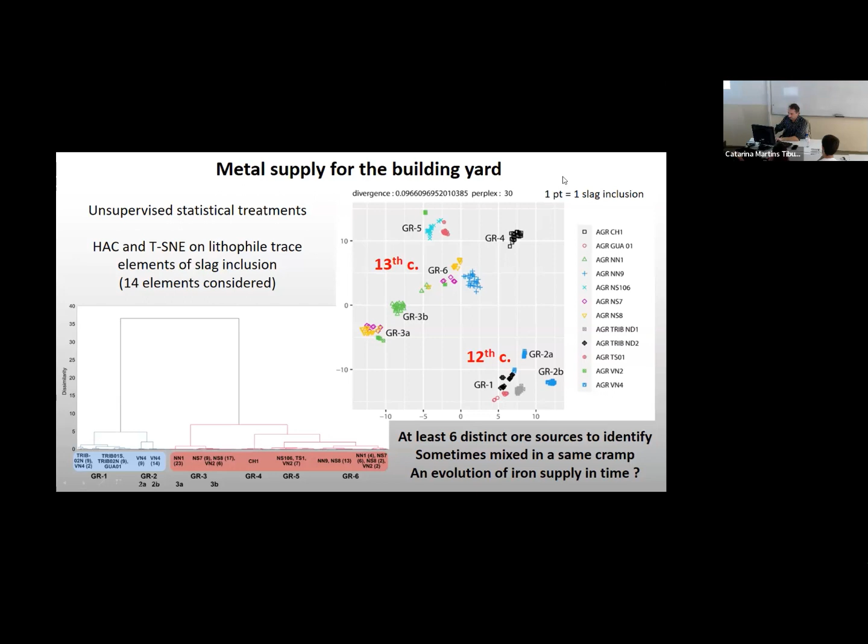So now the question - and we have no results so far because it's Mathilde's PhD work - is not to compare the cramps with one another, but to compare them with real production sites that were known through archaeological remains. There are many iron sites around Paris, and even further, along the Seine and the Marne, the two rivers that go to Paris, to try to link the chemistry of the slag inclusions we find inside the metallic matrix of Notre-Dame with the chemistry of the iron slag, which is the reject of production found on the archaeological iron production sites.

So there's a huge campaign of investigation taking into account former archaeological surveys and excavations from the past 20 years or so, to try to match these iron production sites, or not, with the production seen in Paris. We'll have some results on this question in a couple of years, but that's one thing we are looking into.

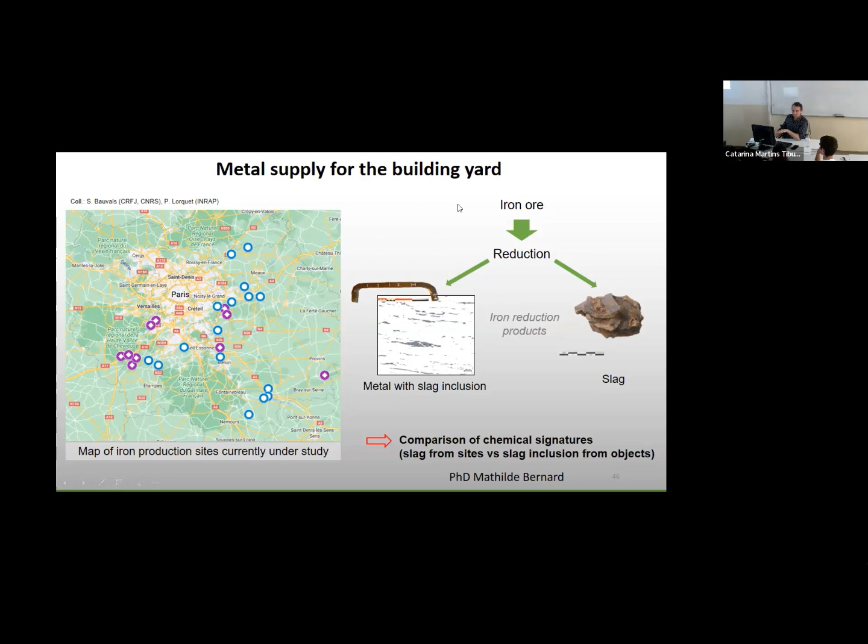So yeah, that's about an hour - I was done with iron. I don't know if you want me to speak about lead or if we stop here, that's fine too. I might have 15 minutes on that. Yeah, so it might be too long. I was thinking that maybe... okay.

So the second metal is lead. I'll start with the end of the story - the end of the story is the lead burning in Notre-Dame in 2019. Lead was visible, not like iron, which was not visible, but it's a metal that is not really often looked into. The fact of the fire, and the fact that it caused pollution too, led to a better interest in this material. I've been personally working on lead on other monuments for about 10 years, but Notre-Dame was never a subject of study before.

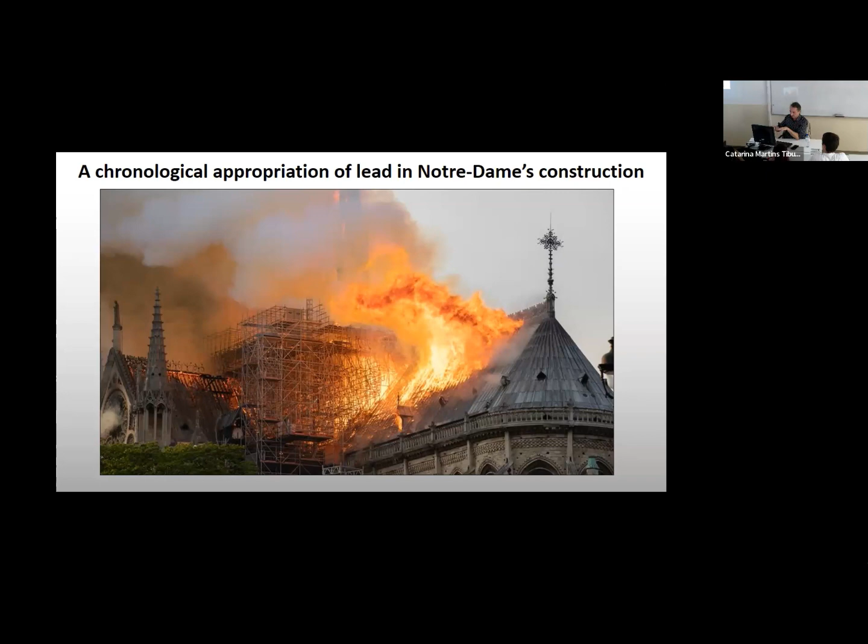What's complicated with lead, compared to iron, is that when I spoke about reuse of iron in ancient times, you always see the marks of reuse inside the matrix, inside the object. With lead, you melt it at 320 degrees, and once it's molten, you can remelt it and recast it again and again, and you do not really see the difference. It's slight, but you cannot really see it.

And actually, the roof that burnt was not the first, was not the second, but was actually the third roof of Notre-Dame. We know that there's a first lead roof that was made at the end of the 12th, beginning of the 13th century, after the framework, of course. And that's important because the only mention, the only word we have on construction material from historical sources in the 12th century - in the donation, in the testament from Bishop Maurice de Sully - is about lead.

So it means it's an important material. Only the greatest cathedrals were covered with lead. It was really prestigious material at that time because it was shiny, because it was a material coming from silver mines, because lead is mainly extracted from silver mines. Lead or silver ore is lead material, so it was produced by powerful people, not really like iron.

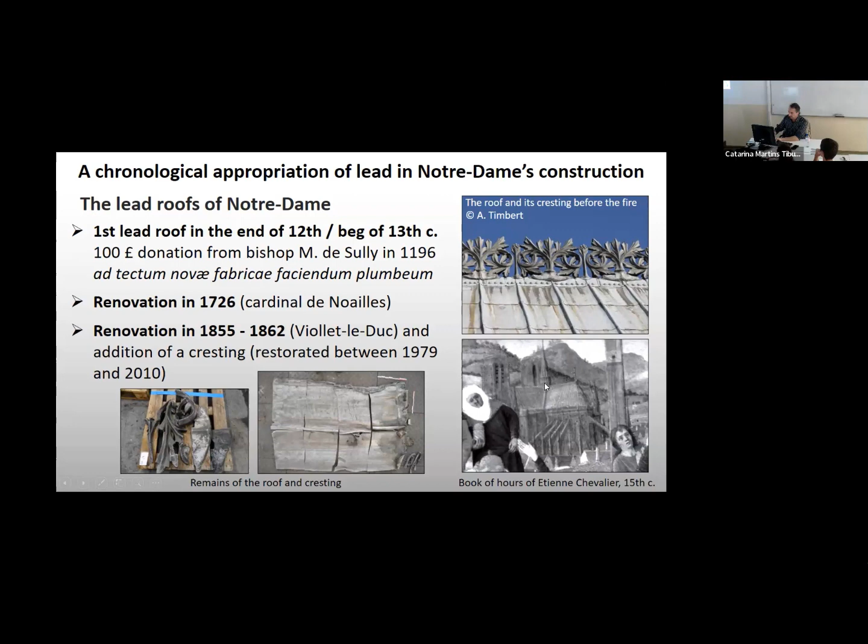And another renovation a century later by Viollet-le-Duc, who added also the cresting on the top. So you have different presentations of the roof, and there were also great use of lead in the 19th century for other roofs, new roof in the sacristy, in the newly built sacristy of Notre-Dame, but also the decorations of the spire, and the spire which is totally made of lead.

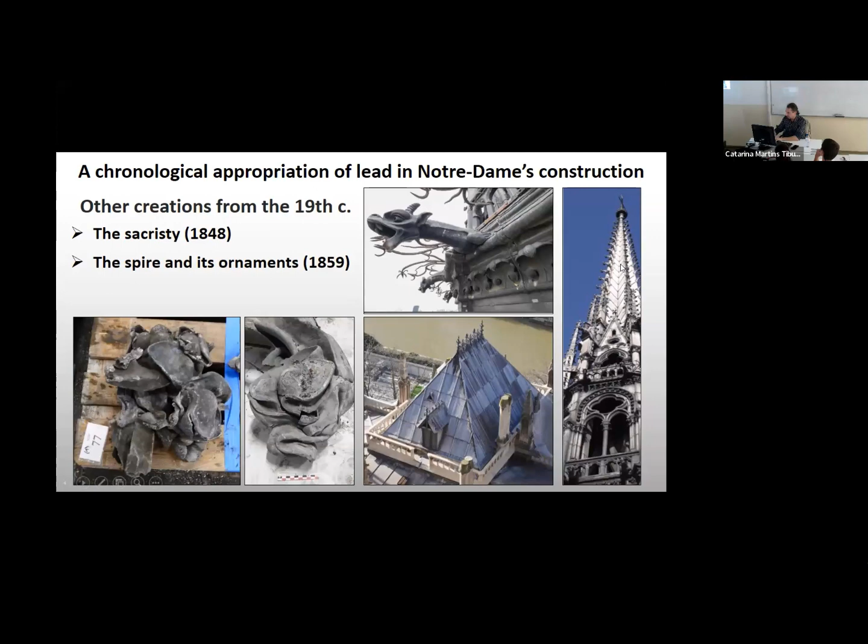It's lead on wood and also iron armatures, as I spoke of. But there's dozens of tons of lead in the spire too. Many uses for decoration in the 19th century.

And also in the 13th century, I said that the iron cramps were sealed with lead. You can see how it's done, but also lead was an important material for the stabilization of some structures, especially the slender columns that you see here, all the traceries of the windows, because it's soft lead and it helps thin pieces of stone, which could be fragile, to absorb when the masonry is loaded.

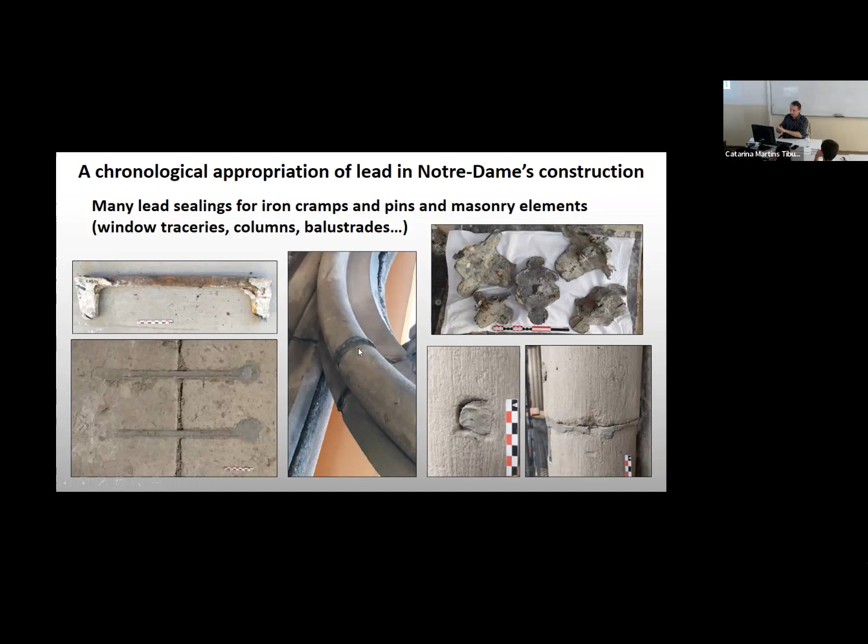Then all the pieces of stone, they do not take the load the same way, and so it helps the stone not to break. And that's the lead, as you can see here. The lead is not inside the stone; it has been pushed out because of the pressure of the upper parts of the stone, but the stone did not break.

So the questions are the same, but not exactly as for iron. I spoke about the uses of lead just before, and to know what quantities were used, I'll just speak about this regarding the question of the roof. But also one important question is the question of supplying lead, and also to understand better this question of recycling, because as I said just before, not like iron, lead is being constantly recycled.

I mean, when you have a lead roof, you need to repair it regularly, and repairing it means to take down not all the roof, but some sheets, and to remelt them and make new sheets, maybe with new lead, maybe with the old lead. We have archives for the 15th century on other cathedrals, and we know that it's the same lead which is sometimes reused and sometimes not.

And especially with the questions of the big renovations of the 18th and 19th century, for which we have no archives at all for the 18th century, but for the 19th century we have some archives, but which are not really precise, and sometimes the difference between archives and archaeological evidence is not always totally the same. The archaeology does not lie, the archives can be not always precise.

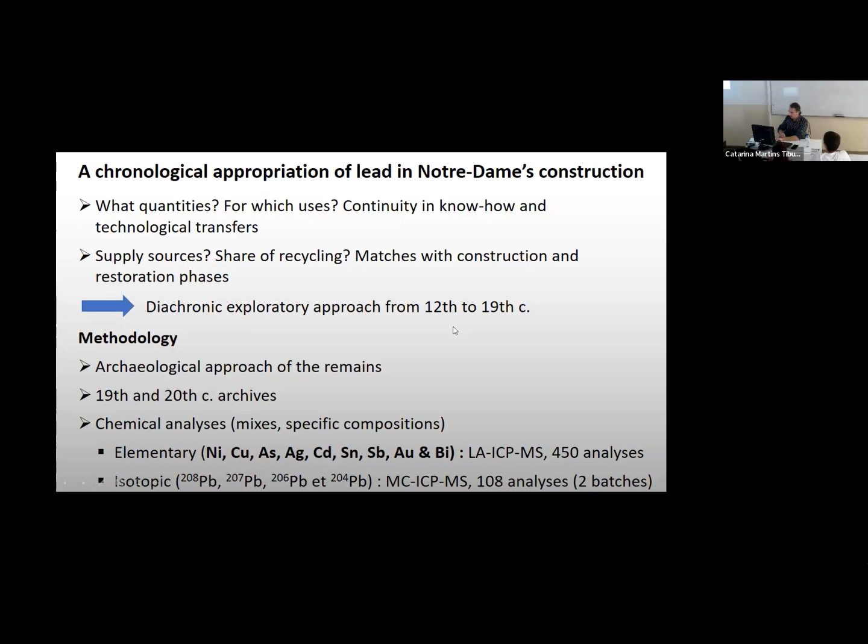So we made quite a huge number of analyses, and it's contrary to iron, where what I showed you was Notre-Dame - we already had great knowledge on what's going on in other monuments because we had a real good background. Here, it's the first time that so many analyses are made on a single monument and that isotopic analyses are made on lead coming from the monument. So it's the first step in a better understanding of all these questions related to the use and trade of lead in the Middle Ages to the 19th century.

So about the quantities, I was saying that in the roof, for example, we have some information about the second and the third roof, not much for the first, the medieval one.

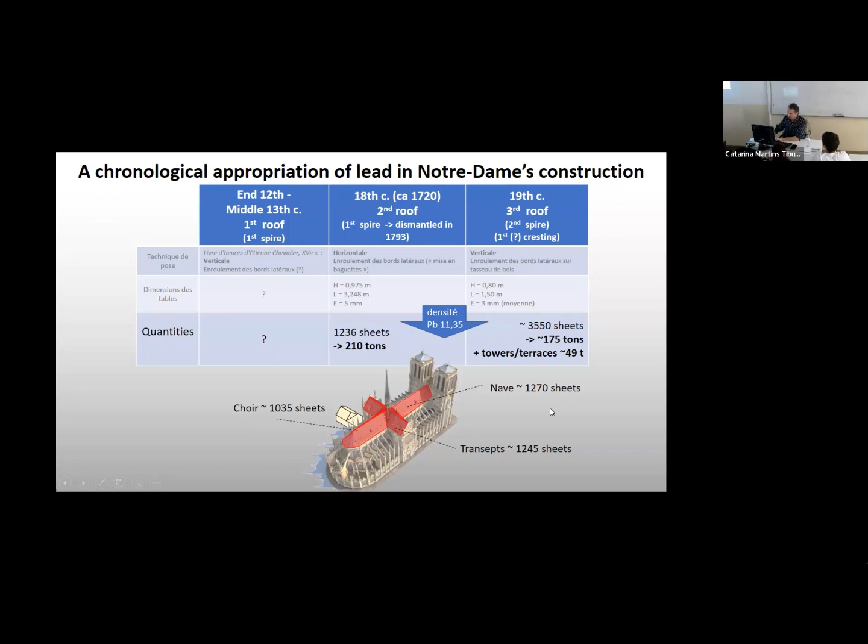So we have detail from counting that we made, and also from some accounting that we have about the quantities of lead sheets that were cast at the time of the reunion. And what we know also, I was speaking of reuse, we have some accounting that says that above the total roof work, there was apparently 160 tons of old lead gathered from the former roof, and that 67.5 tons of new lead were also collected to make parts of the roof. So we know at some places that there was old lead used. And there's also the spire - that's why it's a bit more than 170 tons. So we have some partial information thanks to accounting books.

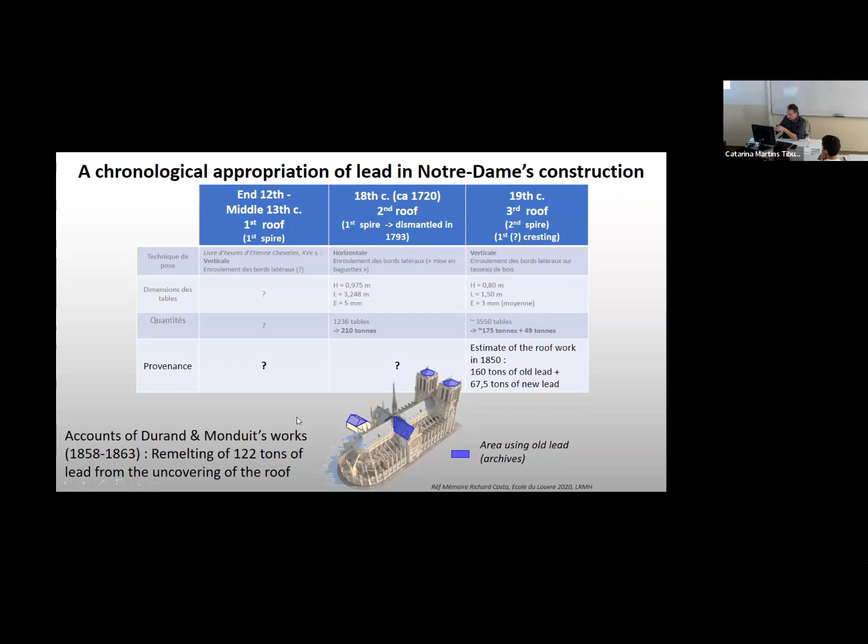And what we try to do is compare this with what we have in the actual material. One element which can be used to trace the recycling is tin, because tin is present in soldering, which is made of a mixture of lead and tin, usually 1/3, 2/3, it can be a bit different, half, something like this. Soldering was used, and when you recycle your lead, you would not take the soldering out, you would mix the soldering with the lead, and then your content of tin in the recycled lead increases. So in new lead, you have no tin at all, and when you start to have some tin, it can mean there's been some recycling.

And what we see here is for all the upper parts, the spire, a bit less the spire, but mainly the sacristy roof and mainly the main roof, there's about 4,000 ppm, which is 0.4% of tin, which is much more than nothing. In comparison with a gutter from the 20th century, which is new lead, which has almost nothing. So that's an important clue that shows that probably here what the archives say is true about recycling of lead in the structure.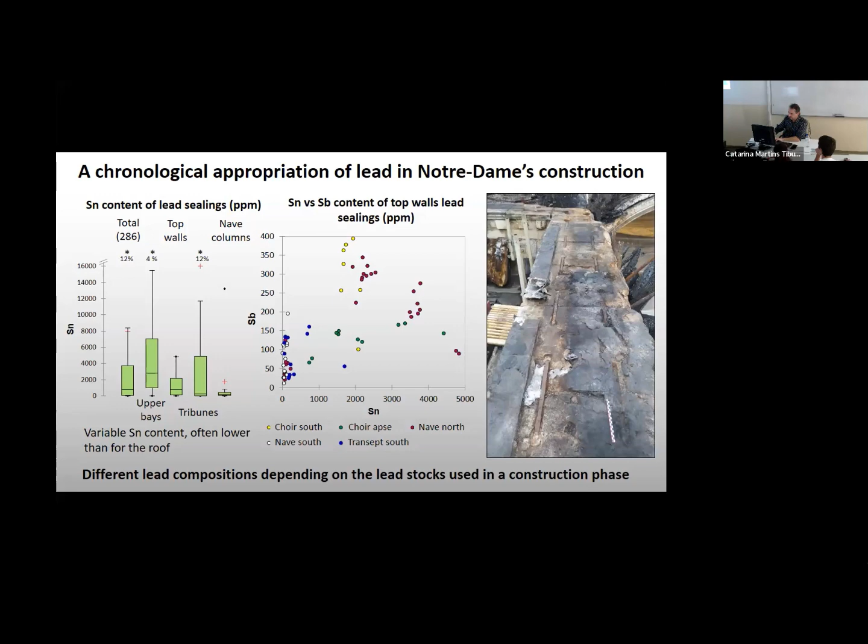And when you compare, not going into the details, other elements such as antimony, which is also present in lead, you see that even on a single batch of lead, you can have really different compositions, meaning that you have different provenances, different sources that are easily being mixed in this spectrum.

Just ending with this first isotopic analysis that we did. So I'm trying to explain this graph, which might not speak to you for the present. What's important in isotopic analysis to gather the different sources is to try to link them with a line, because the ore sources can be rather concentrated or less concentrated, but if you link things with a line, it means it should come from the same source.

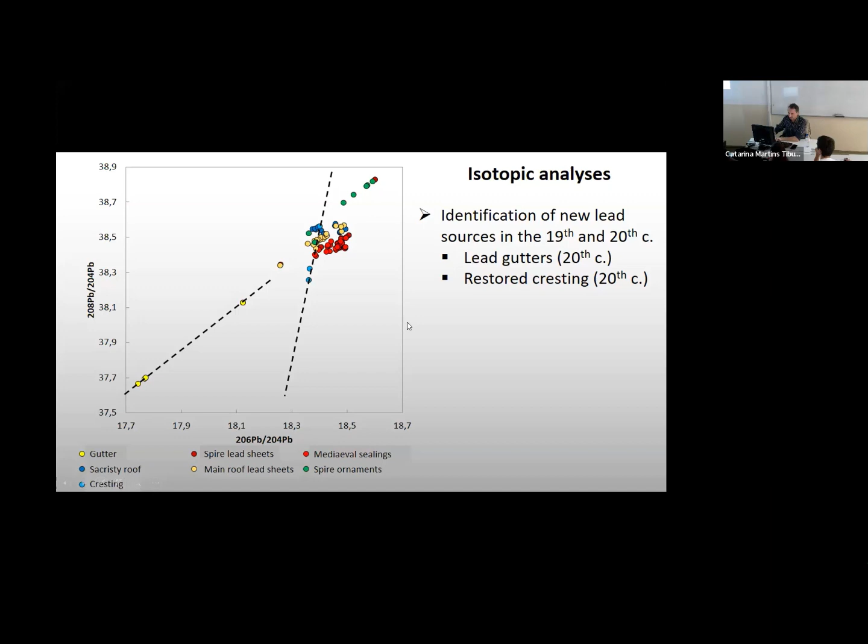And here you can see that some of the sources are clearly distinguishable. The lead gutters of the 20th century, as I spoke of before, are clearly aligned, clearly different from the rest. So this is new lead from a single mine, which is not being mixed with something else, apparently. Here, restored cresting for the 20th century, also the blue ones, the light blue ones, have a clearly different line, very different components.

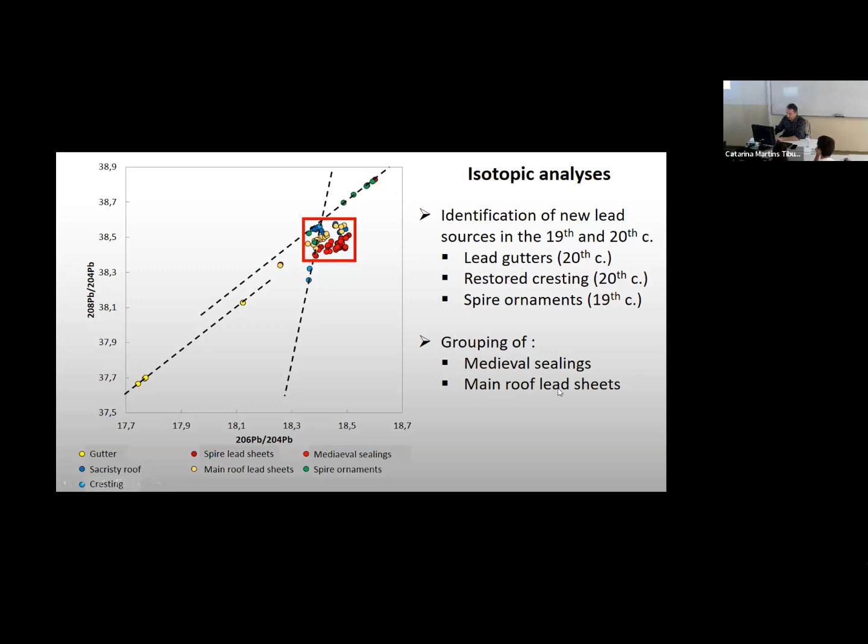Spire ornaments also, which are shown here in green, not all of them, but some of them show truly different lines, meaning that in the 19th century for the spire, there should be some new lead provided from somewhere. Most of the lead in the middle here is grouped in something which cannot really be called a line, but rather a group. That's the medieval sealings, and that's the main roof lead sheets we spoke about.

So we try to detail this. That's a highlight on this box, showing that even though they're close, the roof lead sheets and the medieval sealings seem different. To me, this means that the first lead roof was cast in the 13th century, probably with the same sources of lead as the medieval sealings, which did not move and are truly from the 13th century. So if here we have something different, it means that in between, there's been a new source of lead. To me, that's probably the 18th century, when the renovation might have taken the medieval lead out and replaced it with another lead.

If we agree that in the 19th century most of the lead was reused in the new construction, then it means we have information here about the restoration of the 18th century that erased the medieval signal of the lead, at least partially, or I think totally.

Then, if we look at the 19th century lead here, the medieval sealings are not here anymore, it should be here. You have the main roof, which has the same color. You have the spire ornaments here. And we can see that we clearly have two different lines. This one is the line I spoke of before, the new lead for the spire ornaments, which also seems to appear for part of the sacristy roof.

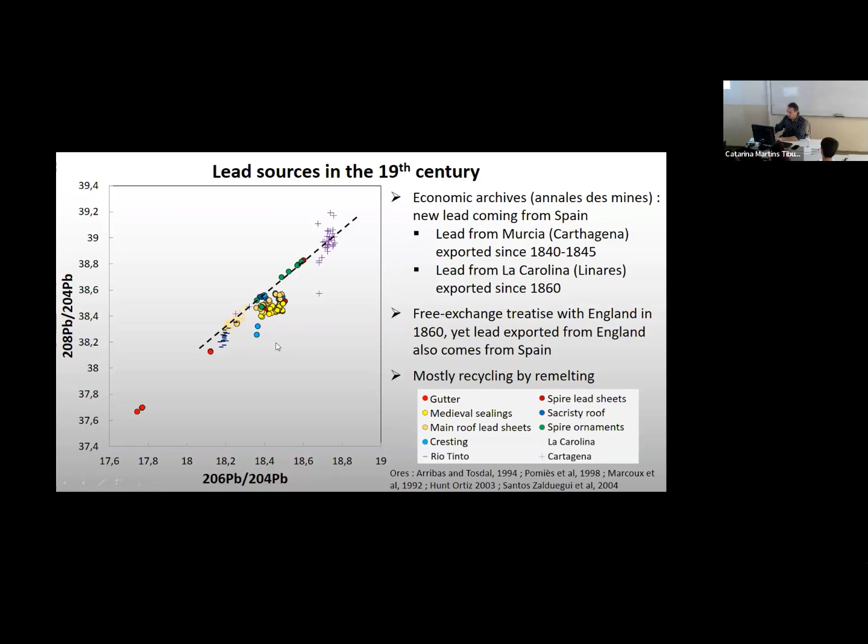So it might come directly from Spain before the 1860s, and maybe through England, because at one point Spanish lead comes to England and then is exported from England to France. So when it arrives here, it's English lead, but English lead originally from Spain. So here we have evidence, regarding the archives and regarding some of the analysis, that this lead road arrives at Notre-Dame, but also with a good share of recycling, as I spoke of before.

So that's what I wanted to talk to you about regarding this research on iron and lead. As you understood, it's continuing, because now for the lead we have to compare Notre-Dame with other monuments from medieval times and from the 19th century, to see if the patterns are the same, or if they differ regarding the commissioners, the architects, or the Parisian building yard.

And for the iron, there's a PhD coming which will give much more information, especially on iron supply for great building yards located in Paris, perhaps also such a Parisian pattern with the Sainte-Chapelle, with the Château de Vincennes, looked at before, but never for the question of provenance.